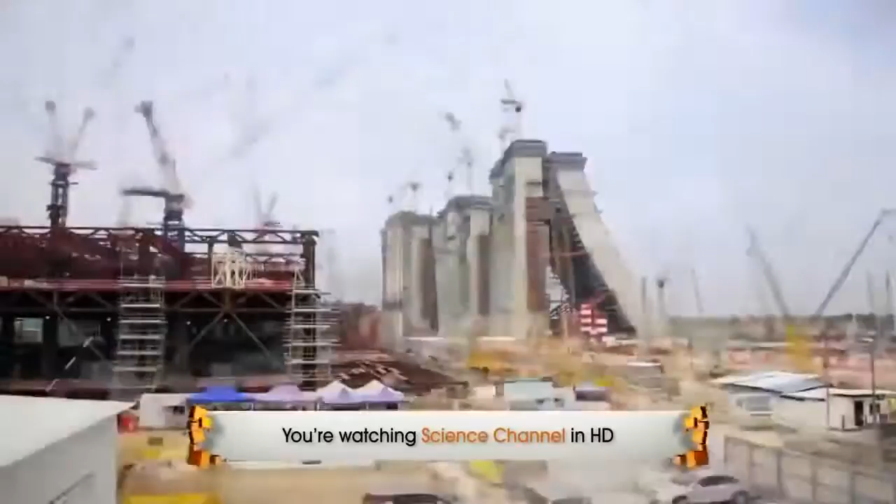Incredible feats of architecture. And right now, I'm going to take you behind the scenes of one of the largest construction projects in all of Asia. Singapore is reinventing itself. This small island nation is attempting to finish one of the most audacious buildings on the planet. It's the country's first casino, 3 skyscrapers, covering 9 million square feet, and topped off by an engineering masterpiece, the first ever Sky Park.

Longer than 3 football fields, with gardens, swimming pools, and restaurants, all higher than the Seattle Space Needle. We're actually in the pool right now. We're in the pool. This is the view from the pool. Wow. It's pretty spectacular. That is amazing.

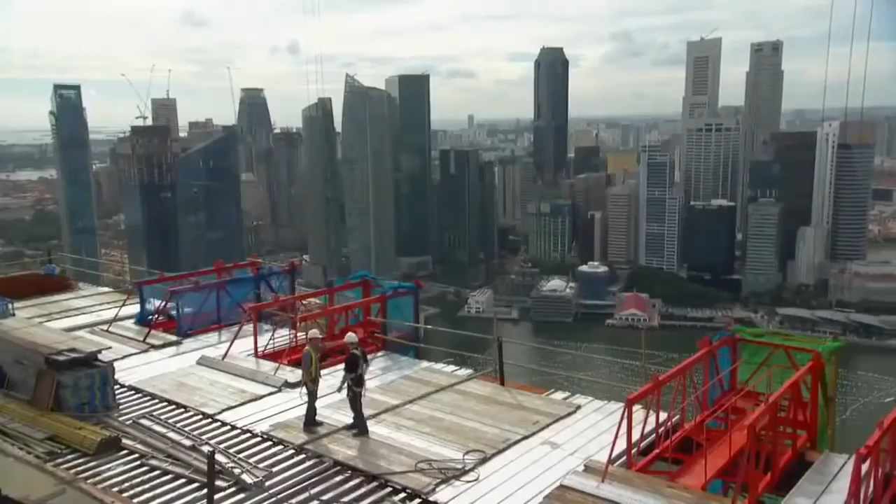To finish it, crews must perform some of the highest and heaviest lifts ever attempted. I mean, you're putting a piece of steelwork the size of an aircraft carrier on top of 3 towers. Tackle one of the largest paint jobs on the planet. You would never do this in America. And erect one of the longest cantilevers in the world, 200 feet out over nothing. Oh my God, that's enormous.

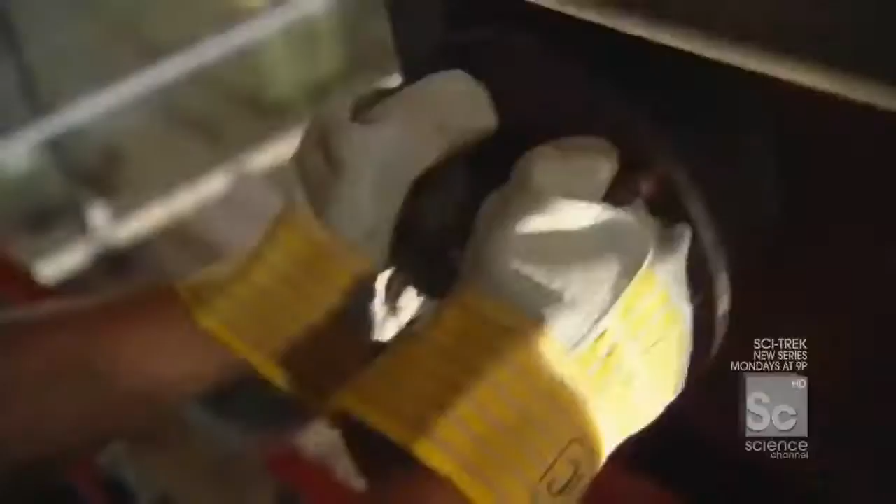I am in Singapore, a tiny island nation with less than 5 million residents. In fact, the entire country is smaller than all of New York City. Located at the southern tip of the Malay Peninsula in Southeast Asia, the main island of Singapore is both a city and a country, one of the most densely populated in the world.

Culturally speaking, it's a somewhat strict and buttoned-up environment. Chewing gum, against the law. Insensitive behavior is punishable by fine. And if you're caught vandalizing a building, you quite literally get hit with a stick. But despite this conservative cultural backdrop, Singapore is attempting to reinvent its image by doing something totally surprising. They're going to open a massive casino.

With no natural resources of its own, Singapore is risking $5.5 billion in hopes of cashing in on the gambling boom exploding across Asia. It's a pretty significant gamble because for Singapore, you've never had gaming before at this scale. You've never had a resort at this scale. Yes. You're taking a kind of a major leap. Yes, it's certainly a transformational project for Singapore. Where you hope to actually not just double, but triple the tourism receipts. That's big.

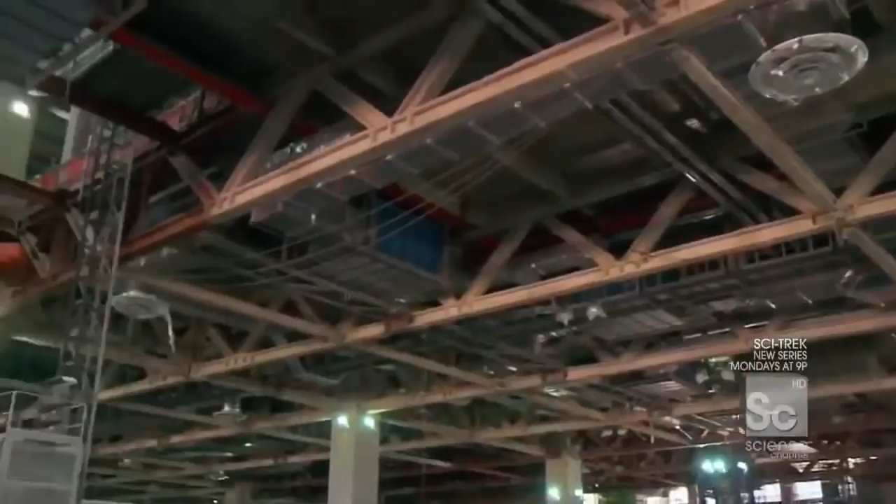The centerpiece of this giant transformation, the Marina Bay Sands. One of the biggest and most expensive casino complexes in the world. Unlike any hotel and casino ever built. Rather than just being a traditional hotel and casino that we might find in Vegas, instead, we have a museum, you have theaters, you have retail, you have a casino, massive convention center, 3 incredible hotels, and all of that capped by the first ever Sky Park. That is absolutely right. The Sky Park on the very top will become the icon of Singapore, we think.

In a move that has never been done before, world-famous architect Moshe Safdie put a park across the top of 3 massive skyscrapers. An 1,100-foot-long urban oasis with tropical gardens and one of the longest swimming pools on Earth. All of it perched 55 stories above the ground.

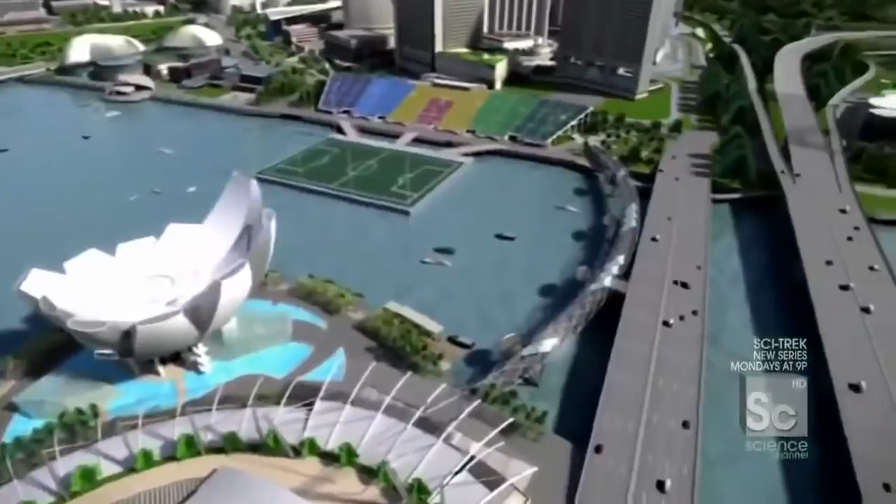So, Brendan, how do you describe a Sky Park to people? I mean, it's just a fantastic structure. I've never seen anything like it. There's 3 55-story towers, and you're putting a piece of steelwork the size of an aircraft carrier on top of it. So it's quite a feat. And there's a park up there. There is, well, there's more than that. There's observation decks and swimming pools and restaurants and all sorts of things. So it'll be a little city in itself.

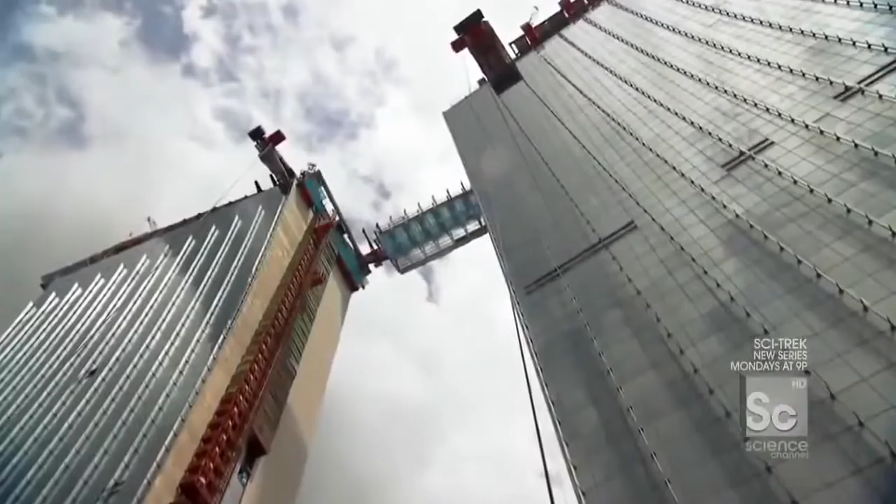The biggest challenge for builders, lifting 7,000 tons of steel, which is more than the main span of the Brooklyn Bridge, on top of 3 650-foot-tall buildings. To get it up there, the team divided the structure into 14 large but more manageable segments. 6 form the bridges connecting the towers, and the other 8 make up the observation deck, which sticks out 218 feet from the end. And right now, crews are about to lift the second-to-last bridge segment, a massive 350-ton piece that will hang between towers 2 and 3.

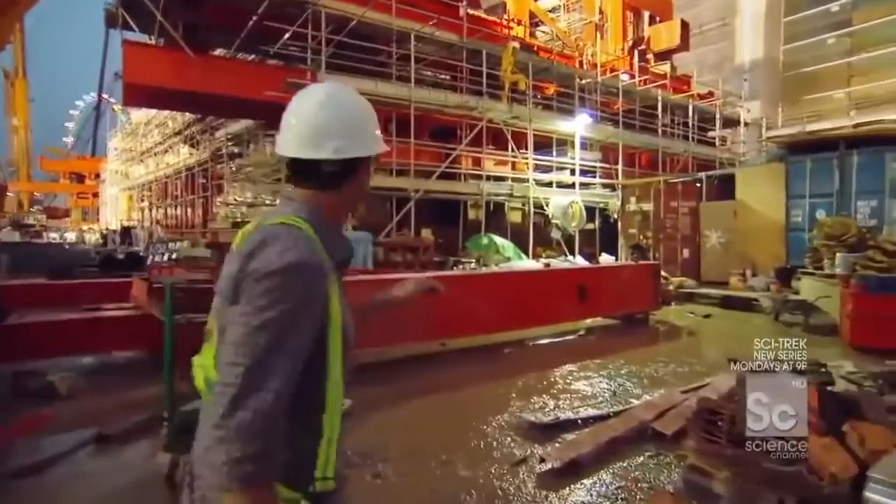It's a little after 7 p.m., and on most job sites, it'd be quitting time, right? Folks would be going home. But here in Singapore, we're about to begin one of the most critical lifts in the entire project. That bridge segment right there, an over 350-ton chunk of steel, is about to get lifted up over 650 feet in the air.

I mean, in principle, this sounds crazy, right? Yes. We're actually taking a bridge, lifting it up, and putting it on top of 2 skyscrapers. Yes. This has never been done. Never done. So you've got to be a little bit nervous to get this thing up. Oh, definitely. Yeah. We have to get it right.

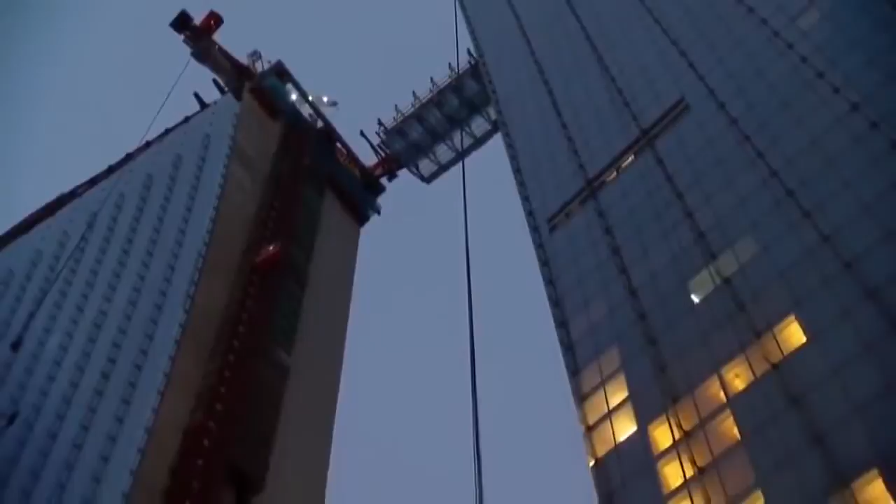Lifting this piece will take some of the strongest hoisting cables ever designed. Going up? All right, Solomon, up here? Yep. They get attached to the very top of the segment, 5 stories up. All right. And now, at long last, I'm on the top of the whole bridge segment, and you really get a sense of its length, because look at that. It spans all the way out between 2 full towers, over 150 feet long. And here, this is what it's all about. This is the shackle coming down from over 600 feet up.

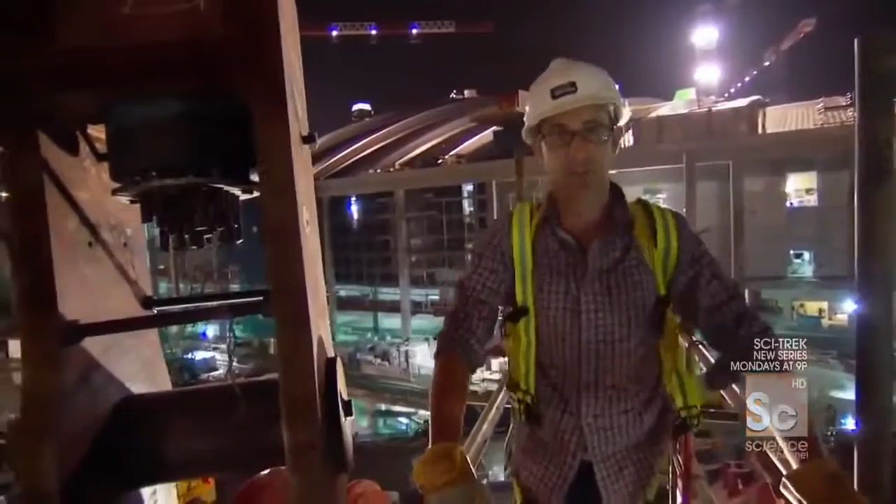And to really get that point, come here, check this out. Look at the amount of bound cables inside of this thing. Just the density. There are 2 of these shackles, one on this side, one on that side. We're gonna lift up over 350 tons of steel. All right, you call the man upstairs. An operator from the top of the Sky Park lowers the shackle down. There she comes, there it is, here it is.

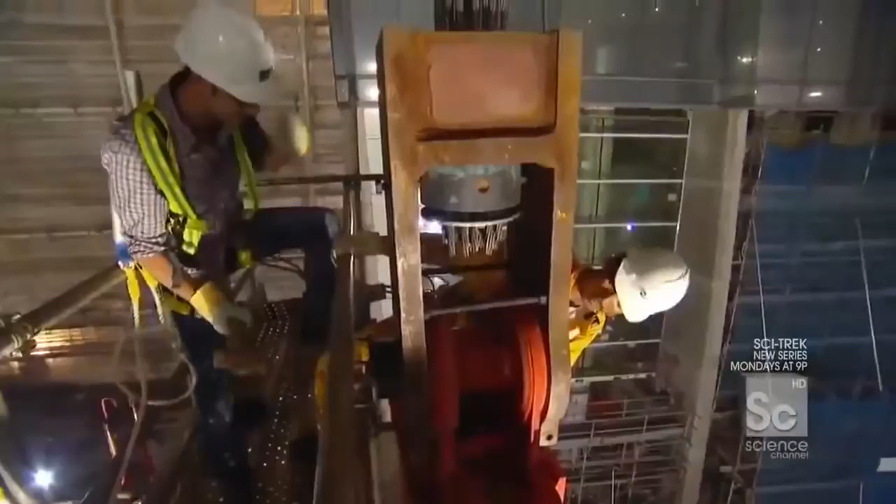Okay, 960 mm. It has to line up within 1/10 of an inch for this 150-pound anchor pin to fit through. Oh no, I'm stuck. Push, fight, come on, shake it a little bit. Hammer, give it to me, Poppy. Not here. You ready? Here I come. Once the pins are pounded into place and the shackles are connected, there is one final step to make sure that the load is secure.

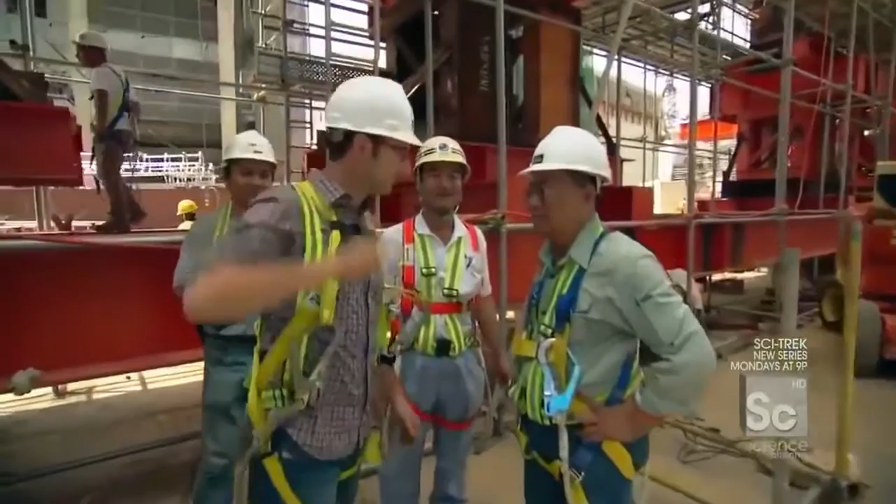Woo! Overnight, crews test the connections for 12 hours by hanging the segment just 4 inches above the support. If everything looks good, it is ready to go up. Okay, Solomon, she's floating. Yes. 4 inches off the ground. Ready for the lift? Yes. How's the wind? If you can see, it is swinging. And if it swings, it might hit the building.

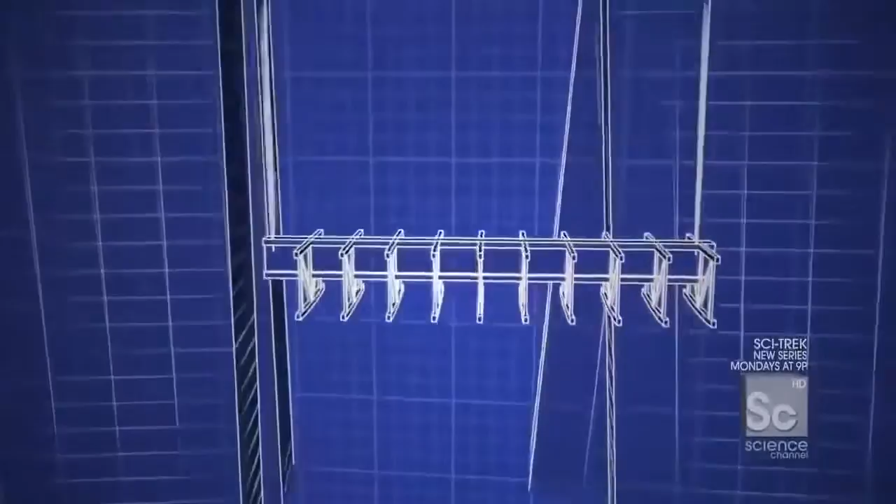So when the lift begins, the concern is in a strong wind, like a pendulum, it could move and actually hit the building. Yes. It's that close to the building? It is very close to the building. Because of the curvature of the towers, this piece must pass within 10 feet of 2 glass skyscrapers on its way up. Any wind over 5 miles per hour is enough to call off the lift. So are we good? Are we ready? Yeah, good. So it's now okay to go.

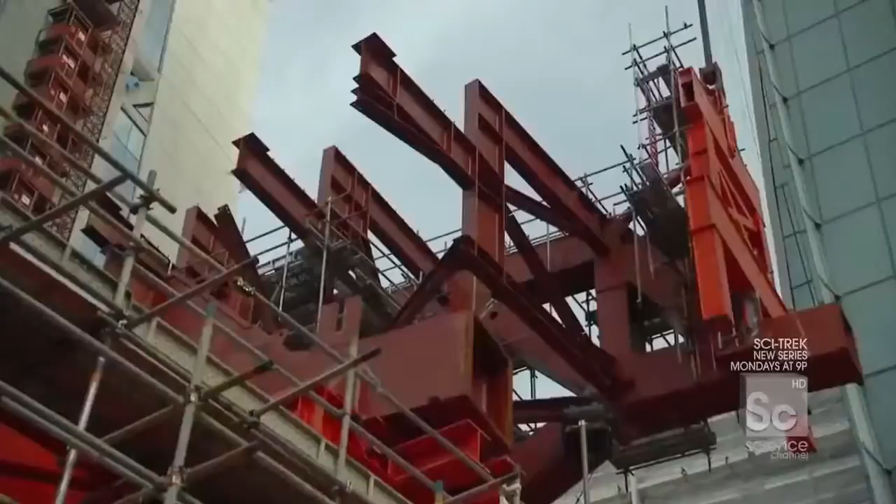Typically, crews would use tower cranes for heavy lifts, but this segment far exceeds their capacity. So instead, engineers are borrowing the technology from a different kind of construction, bridge building. Even the most powerful tower crane can lift about 20 tons. This thing weighs over 360, not an option. So they went with something called a strand jack. And to understand how it works, imagine 2 hands or clamps holding a rope. One hand locks the rope, the other brings the rope up, grabs the rope, goes back for more, brings up more rope, and so on and so forth.

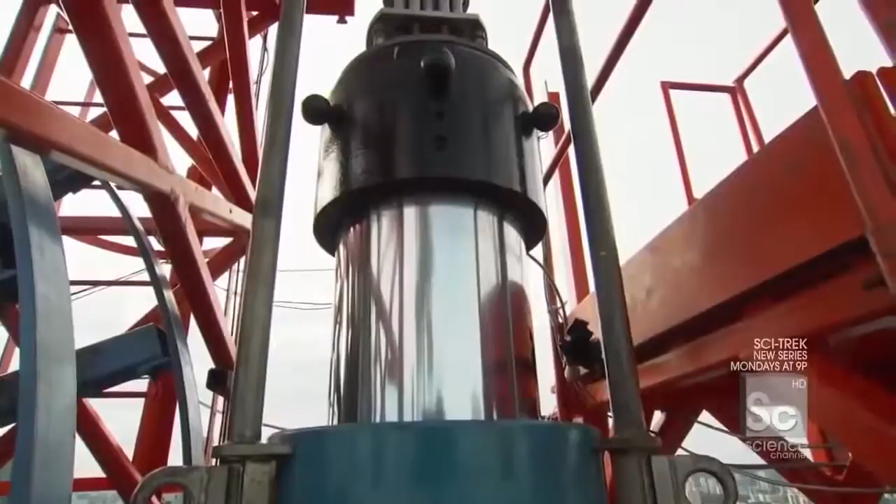Strand jacks work on simple hydraulics. A bundle of 22 half-inch diameter cables passes through 2 clamps. The top clamp grips the strands and moves up almost 2 feet. Then, the bottom clamp locks the cables in place while the top moves back down for the next pull-up. It takes 2 enormous strand jacks to lift this segment, one on each tower. Combined, they could lift the Statue of Liberty. It's the first time that this technology has been used to make lifts this heavy from the top of a skyscraper.

Tony? Danny. Welcome, Danny. Good to meet you. Good to meet you.

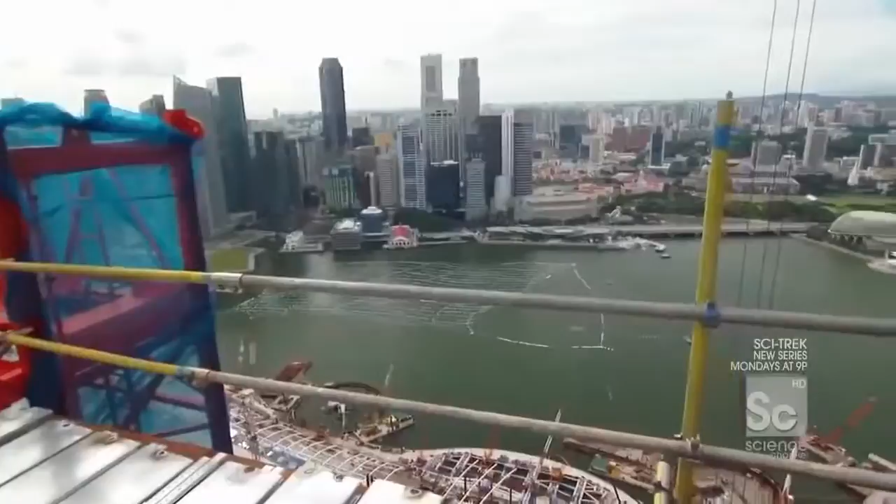Tony, where am I standing right now? Well, you're on the Sky Park. So this is kind of where the action is. This is where the pool is. Yep. Right where we are now is the second swimming pool. We're actually in the pool right now. We're in the pool. This is the view from the pool. Oh my God. People will be able to swim out to the edge of the pool. Yep. And literally, there'll be no edge, right? It'll be an infinity edge looking out over Singapore. Wow. It's pretty spectacular. That is amazing.

And what's making all of this happen is this really just nasty looking beam. That's right. So this enormous frame is supporting the strand jacking units. Now, can we actually head up top to the strand jack? Yeah, we can. Let's go this way. The strand jack sits on a temporary support structure that extends 30 feet out from the side of the tower. Tony, where we're walking right now, we're actually leaving the skyscraper below us and now heading out. We've just walked off the edge of the building.

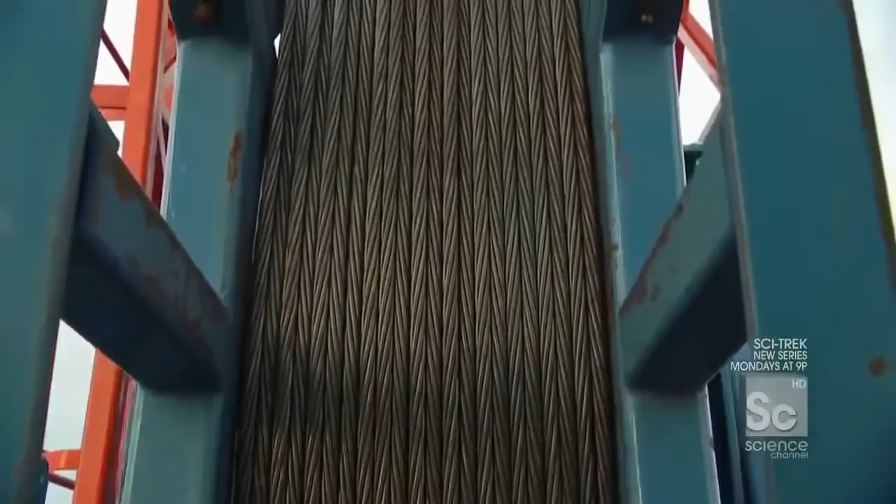Beyond. So we're now standing perched out. There's no more skyscraper below us right now. There's no building below us. It's awkward. It takes almost 30,000 feet of cables to raise the segment, enough to cross the width of Manhattan. And if any of them get tangled, workers cannot lower the piece back down. So one of the most critical jobs on the site falls to the cable manning crew here at the highest point of the Sky Park.

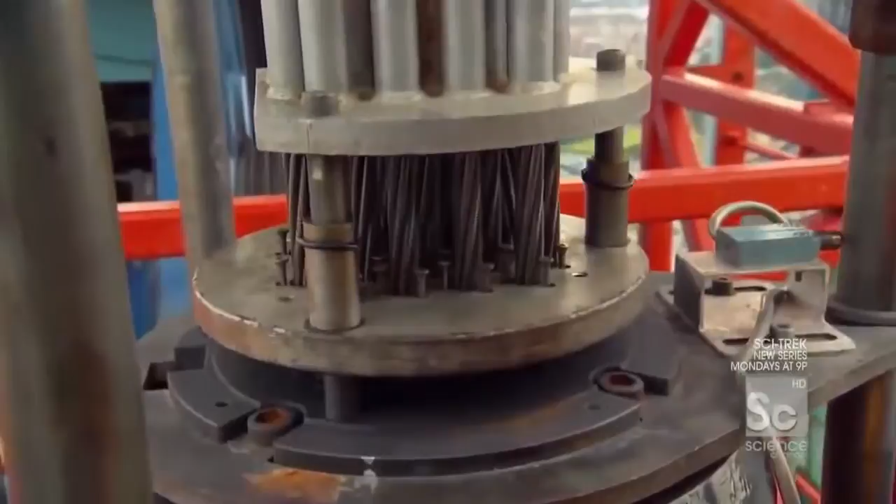Okay, so I am now standing at the very top of the Strand Jack. And you know that because right here, this is it. This is the top of the cables. And what we're about to do, every 30 strokes, they stop everything, clamp the lift, and spray some lubricant inside to make sure everything moves real freely. Unfortunately, I'm getting tasked with that role right now, so what do you got, some WD-40 we're doing this with? Look at this guy. Why is this the most low-tech thing in the world?

Okay, so now what we've done is we've taken the collar off, we've lowered the jack down, now we've exposed the cables to give us good access for some good greasing. Okay, Romley, how do you grease it up? Spray and pull out. Put in, spray, pull out. Go in, spray, pull out.

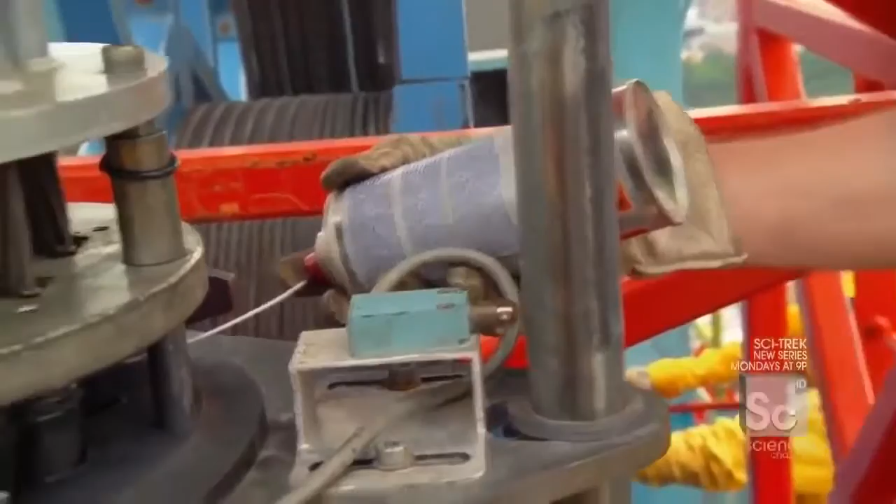You know, it's sort of humbling to have to climb up to this point, to have that behind you, to have to take a spray can like this, stick in, spray, pull out. Stick in, spray, pull out. Go in. These guys have to grease these cables once every hour for the entire night to get this segment up the final 500 feet to the very top of the Sky Park.

Coming up, a one-of-a-kind solution to fight Singapore's intense sun puts up a fight of its own. Whoa. Hang on. I'm gonna pull you right outside of the basket.

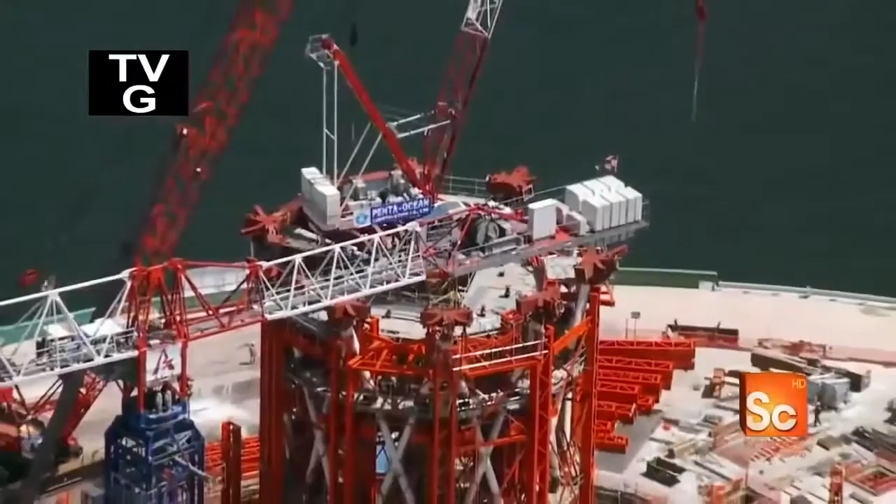Singapore is just 14 miles long. And with literally nowhere else to expand, this tiny island is increasing its footprint by actually filling in the sea, creating almost 1,000 acres of land on which to build an entirely new downtown. So tell me something. If I was standing here 5 years ago, what would I have seen there? Well, 5 years ago, you wouldn't see the floating gallery, you wouldn't see the wheel, you wouldn't see Marina Bay Sands, neither would you see the financial center. So this is a radically different skyline in just 5 years' time.

Yes. Singapore's evolution involved 30 years of land reclamation, followed by 5 years of construction, all culminating with the Marina Bay Sands. So 5 years ago, this would have been called the old downtown of Singapore. Yeah. And now with the Marina Bay Sands completed, this becomes the new downtown. Yes, absolutely.

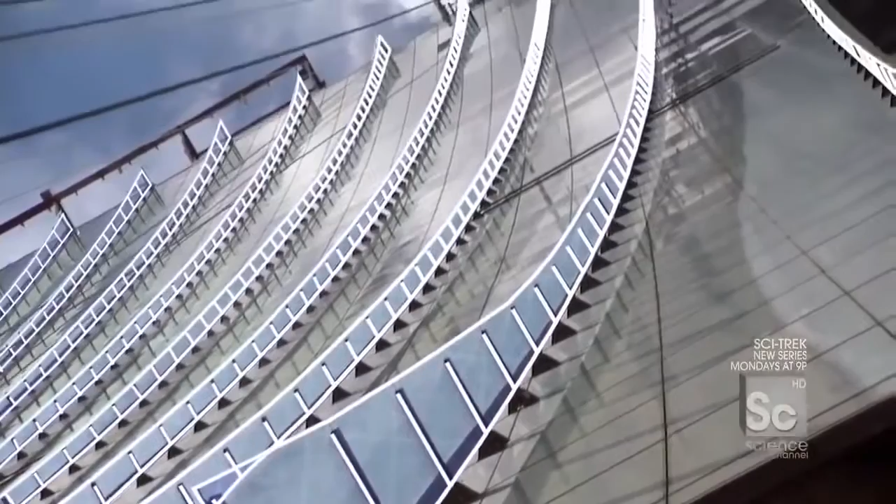The Marina Bay Sands' 3 hotel towers will offer guests phenomenal views of Singapore's new downtown. But they also had to be a stunning centerpiece for the city's redevelopment. So, to define their curved silhouette, the architect clad the tower facades with 1,900 glass fins, which also perform a key functional role for the building.

The western face of the towers gets the most intense afternoon sun. So when the light hits the fins, they actually deflect the sun's rays, casting a shadow that reduces the heat on the hotel rooms by 20%, while still enabling clear views of the bay. But this distinctive design feature is also one of the most difficult to install.

I think today is gonna be one of those days where I go and do something that I kind of think I shouldn't do, but in the name of really understanding how it is they build this building, we're gonna do it anyway. I'm gonna take you in a gondola up the side of a building, almost 600 feet, to install glass fins. And the guys who are gonna help me do it are right here.

Terry? Hi, Danny. Good to see you. David, how are you? Danny, good. Not bad. What are we up to, fellas?

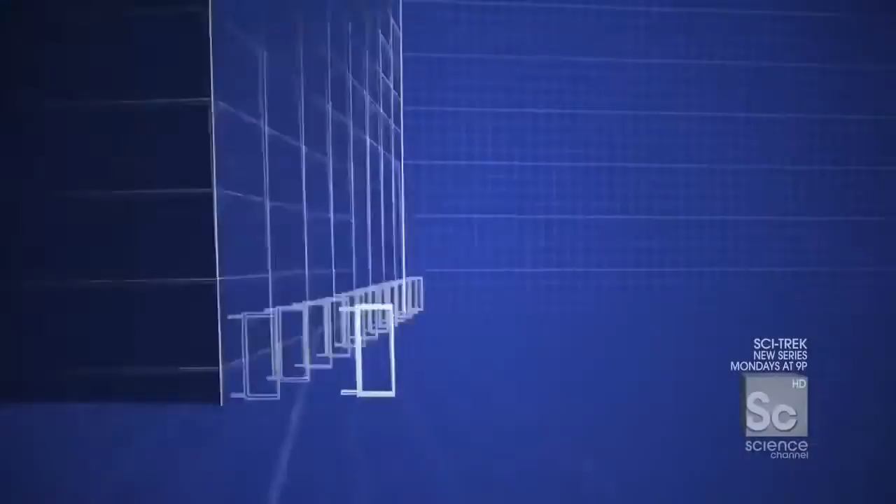We're actually going up to the top. Basically, we're going to install the last fins to Tower 1. And these fins are actually hanging perpendicular from the facade of the building. That's correct. Each fin is 10 feet tall and weighs 400 pounds. They're hung in straight vertical lines, protruding up to 4 feet from the side of the tower.

Because the facade actually curves outward 5 degrees at the top, there would not be enough clearance for the Sky Park lift to pass by. So 12 fins in the upper corners of each tower were left off until now. So this is it. We are closing up the curtain wall of Tower 1. Yes. Big milestone. Big milestone. All right, take me over to my maker. Let's do this. Okay. No problem. Lead the way.

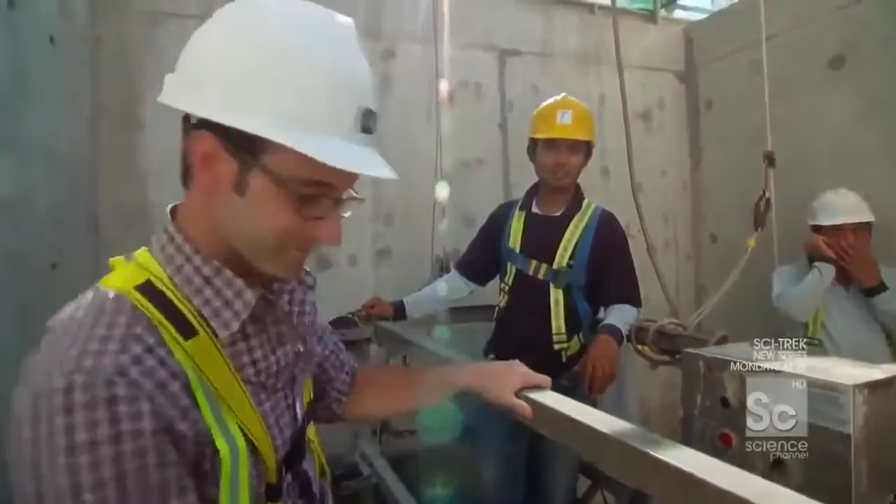Terry's crew installed the fins from a 6-foot-long gondola hanging off the side of the building. Okay. We doing? All right. You gotta be kidding me. It's basically the size of a bathtub, swinging from 2 sets of 650-foot-long cables tied to the tower. Show me the safety, please. It's so precarious that I'm going to be tied to a separate cable in case the main cable fails.

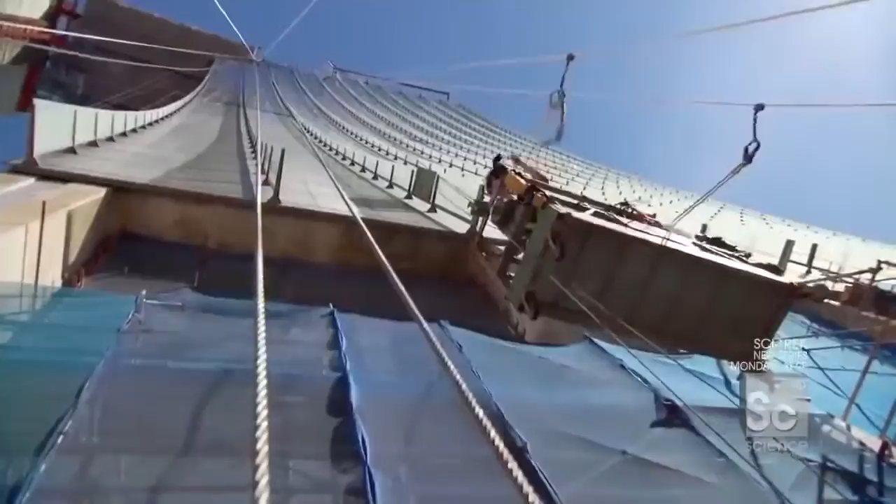Yeah, here we go. The gondola travels at just 0.2 miles per hour. Here I come. Moving along, just moving along. So it'll take me more than a half hour to reach the top. Oh my God. This gondola looks like it was built by the Unabomber. Sometimes I don't really feel like I give you exactly what's going on for me right now, so I want to give you just a little taste of what I'm seeing. There is a fantastic view of Singapore. There is Jay, my chatty friend. And there is not a good situation.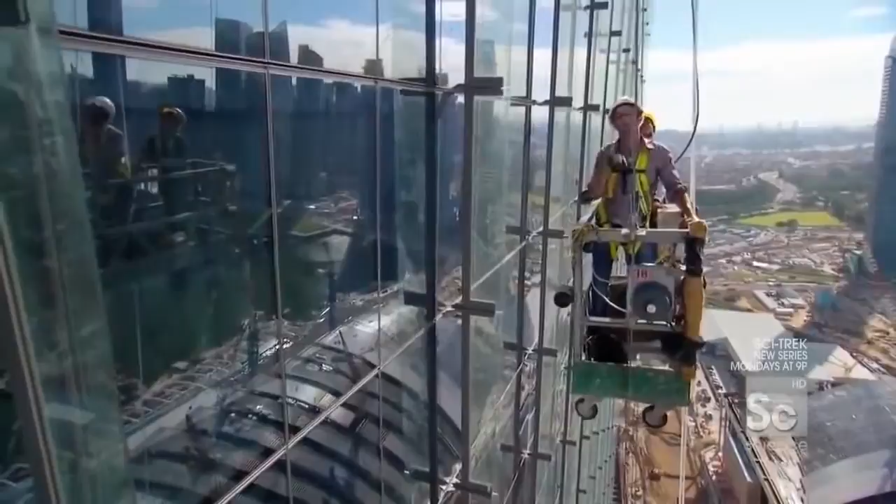All right, we're almost near the top, and you can tell because the building is beginning to bend back on itself and get closer to me. Right there, check it out, we're about 80 feet from the top of the building, and if you look up, you can actually see the missing glass panel. And as I approach the top of the skyscraper, they're prepping the glass. There she is. Oh, the wind is really moving up here.

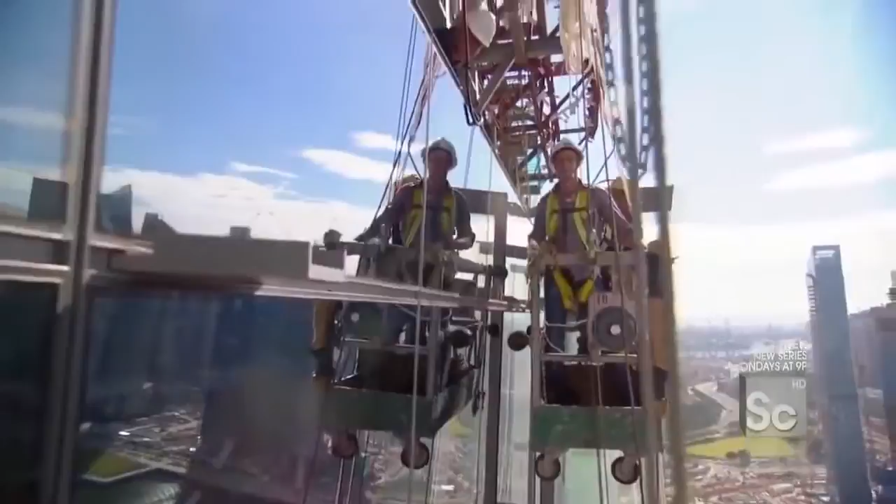That looks safe. Hey, fellas! How are you? Okay. Nice weather, huh? Okay, this is something you don't see every day. I'm outside a skyscraper, and right here, right now, I am touching the top of the building. We are on top of the skyscraper. All right, who's ready to install some fins?

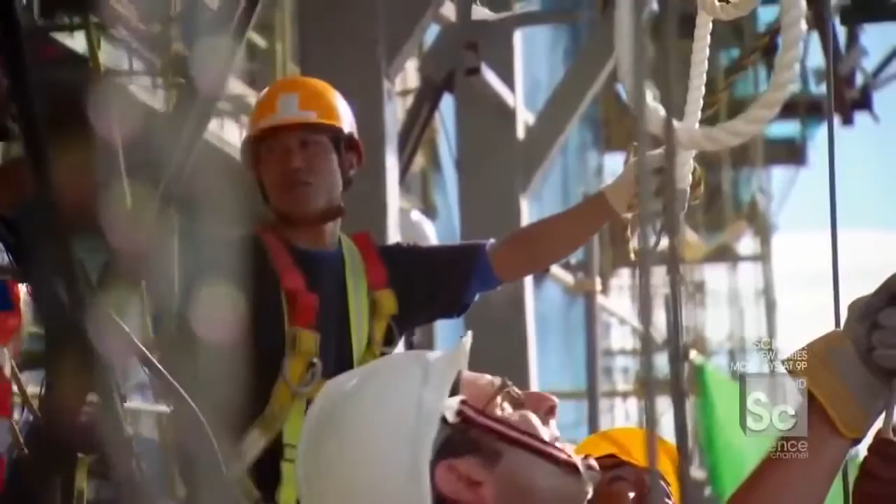Each fin is a custom-built pane of solid glass. I've got the line. Hang on. On a calm day, they are extremely difficult to manage. The wind is blowing this thing out. Give me a hand. But on a day with even a light wind, the task is almost impossible. Hang on. You feel like it'll pull you right outside of the basket. Give me some help. I'm not kidding. Every time you get a little gust of wind, I can feel my feet getting pulled a little bit. There she is, slowing down.

It's basically like a big double laminated glass sail. And if the wind catches it, I mean, it moves. Okay, let it come down a little bit more. The fin can swing up to 20 feet while attached to the tower crane. Coming this way. Okay. Watch out. Someone help him. That's just too dangerous for the final installation. So the team has to transfer it to a more precise chain block mid-air.

Whoa. Hold that side, please. All right. So this is it. What we're doing right now is essentially taking the load from the crane and transferring it to that chain block. Are we in? Okay, I think we're set. This is another one of these moments in my life where I say to myself as an architect, did you really need the fins? Did you have to have fins? Building would have been fine, you know?

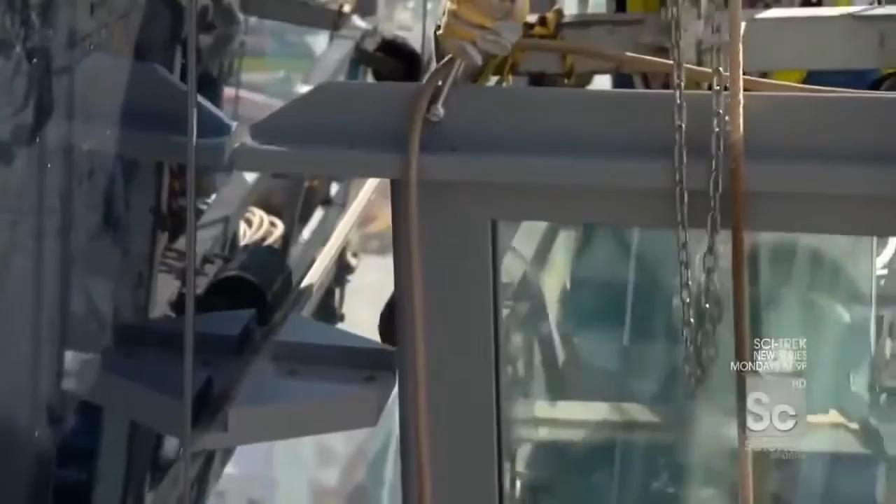Okay, gondola down. The fins are designed to clip into each other at the bottom. Lean down now, Jay. But here, at the very top connection on the highest fin, it gets locked to the building with bolts. Oh boy, this is gonna be a nasty one. Okay, Jay. 4 bolts. Give me your thoughts. 1, 2, 3, 4. Are we good? Come here.

Bring it in. I need some. Come on. Give me it, babe. There it is. Okay. That's right. Whew. 4 bolts, locked in, lined up. We, Jay, are done. Can we go home? Home. That much he understands. Let's get out of here.

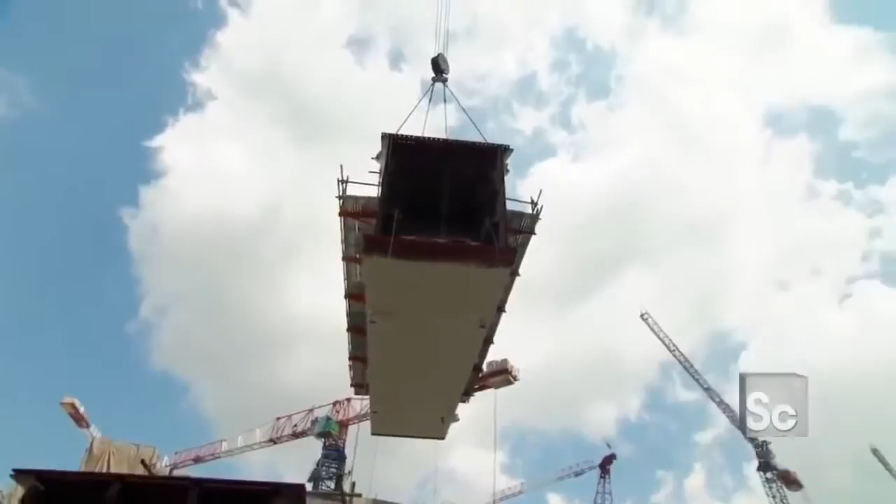Up next, building one of the longest and highest cantilevers in the world, jutting out more than 200 feet over nothing. Oh my God. That's enormous.

Singapore's new Sky Park is the first of its kind. A steel structure longer than an aircraft carrier, on top of 3 skyscrapers taller than the Seattle Space Needle. And on the northern end, the architect took this innovation one step further, creating the longest cantilevered observation deck in the world. It's the biggest and heaviest section of the Sky Park, and it hangs out 200 feet over thin air.

When it's done, the Sky Park is going to look to the eye like one 1,100-foot-long continuous element. But the reality is, it's actually made up of two very different structural conditions. Bridges on the one hand, and something called a cantilever on the other. Spanning between towers 1 and 2 and towers 2 and 3 are two bridges, basically acting like tabletops. The force goes from the bridge, transfers into the towers, and down something called shear walls into the foundation.

Now, the cantilever is a different story. A cantilever, by definition, is a load supported on only one side. So what you have here is a 218-foot-long span, almost like a diving board, perched out over nothing. Intuitively, that load wants to just twist off the building. So to keep it down, they've put not one, but two 700-ton backspans holding down the cantilever. The two backspans weigh as much as a fully loaded freight train, but that weight is critical to balancing out the cantilever, which will jut out longer than a 747 from the end of Tower 3.

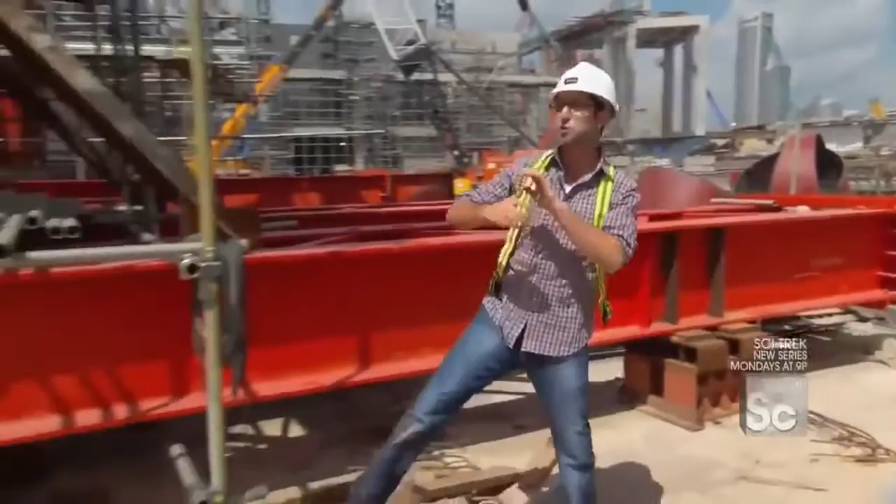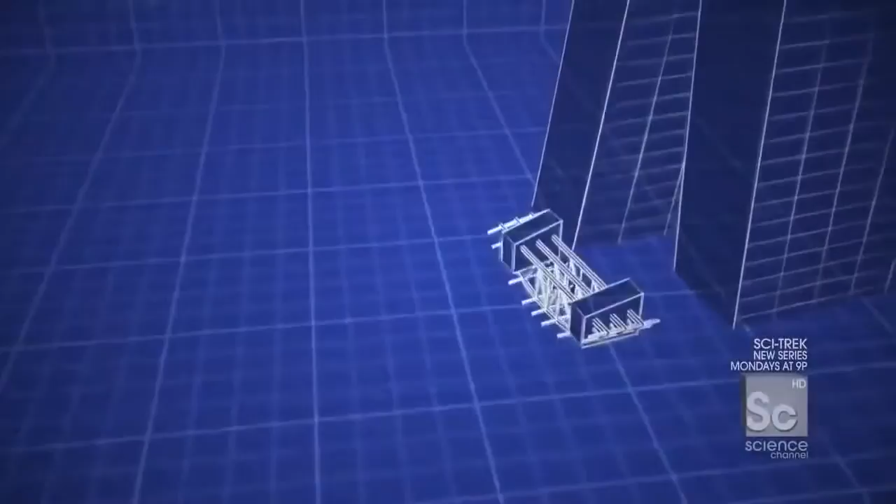There are 860 tons of structural steel that make up the 218-foot-long enormous cantilever. It is so big that they actually assemble the entire unit here on the ground before sending it all the way up there. The cantilever is just too big to be raised in one single lift. Instead, it's divided into 6 segments. Once they're 650 feet in the air, crews will have just one shot to fit them together. So before the segments can be lifted, they're assembled on the ground to be sure that each connection will fit perfectly.

So these pieces behind me represent the very final pieces of the cantilever to be assembled here on the ground. So once we get this and this bolted onto that massive cantilever, the lifts can begin. So the crane's now setting the shackles up. We're going to go on top of the piece to connect it. The piece we're attaching today is 12 feet tall.

Come on, jungle gym style, baby.

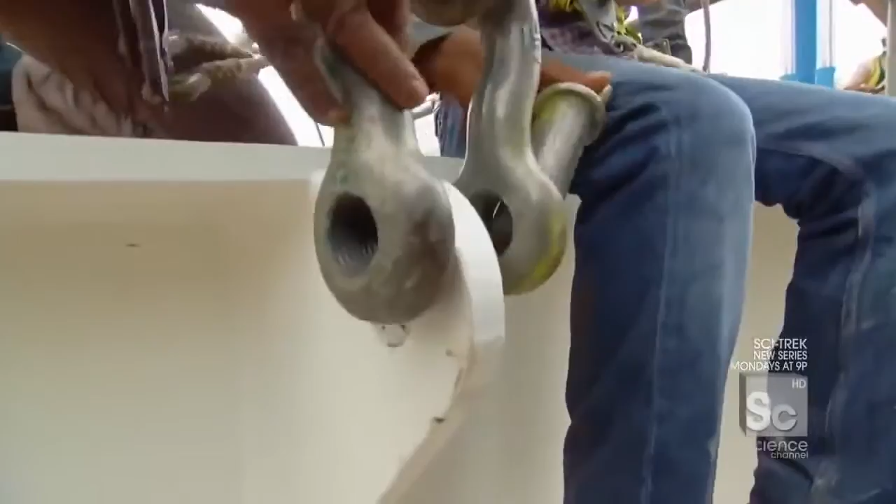And it weighs 30 tons, as much as 2 Mack trucks. A crane will lift it over to the rest of the cantilever using 4 extra-large shackles. So Viram's now tightening up this shackle. So shackle number 1, 2, 3, and 4 are all connected. The next step is to take the piece that I'm standing on, lift it up, and extend that cantilever another 50 feet.

You ready? Knuckles? Knuckles! All right. You ready, Knuckle Man? Knuckle Monster, you got it. Nux Magoo, come over here for that. Bang! We are ready to go. Okay, I'm ready.

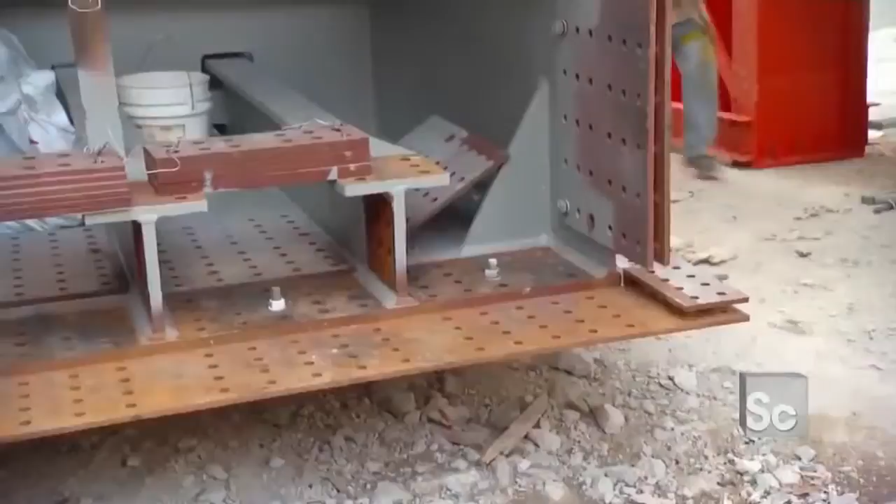So what they've done is they've just put a bit of tension in the line, lift the piece just off the ground to make sure the shackles look nice and they know where the center of gravity is. So are we good? Are we ready? Yeah. All right, let's go. She's off. Out of our hands. Now the crane's got her. Just gonna swing her all the way around this way. What's really worth noting is as you look at this thing, this massive floating piece of steel, it's but a small fraction of the entire cantilever that's going up there.

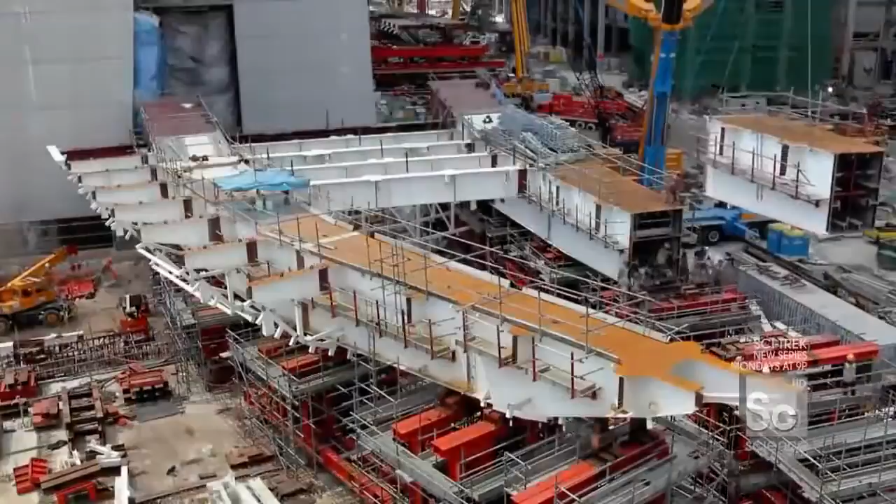Even with 1.5 million pounds of steel, this cantilever will still be susceptible to the problem facing all structures: movement. All buildings, all bridges, even all cantilevers have a natural frequency, meaning they move ever so slightly. Now, if the movement of wind, or the movement of people even, starts to align with that building's movement, it can combine and collaborate and literally shake a building. So when the engineers were designing the cantilever, they had to be concerned with not just how many people stood on the edge, but also how they were moving.

This cantilever has been designed to withstand wind and earthquakes, but its most dangerous threat could come at the hands of a DJ. Yeah, it's thousands of tons of structure up there, so you and me jumping about, it's not going to do very much.

But if you get 100, 200 people all jumping up and down at the same frequency, then it can actually excite the cantilever and you actually start to feel it. Right. It would take hundreds of people dancing to the exact same motion, like the Macarena. Yes, that's right. And believe it or not, our dynamics engineers have iPods with thousands of songs in them. No way. That actually have the frequencies of all of these songs.

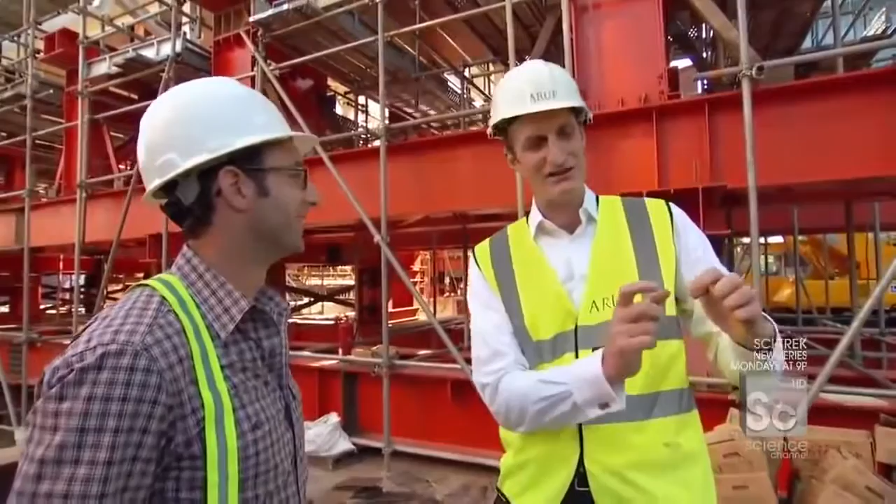So, once we actually find out what the frequency is, in theory, you can say you can dance the Macarena, but you can't dance the bus stop or whatever. That can't be true. Is that true? Yeah, that's right. So you're telling me that some engineer is doing intense load calculations and solving the fact that this thing can take the electric slide, but it cannot take the achy breaky heart. And they know that in advance and it's been designed.

More or less, yeah. Imagine the party, like it's the party's going great, a big wedding, and all of a sudden someone puts on the Macarena and is like, no!

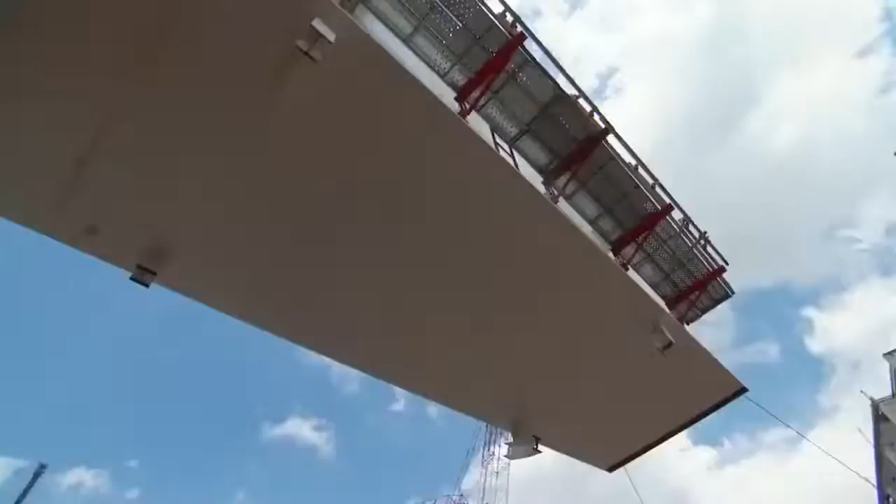Now that the piece has made its way over to the rest of the cantilever, the next major challenge is lining this giant segment up for attachment. So the piece is now literally sitting right on top of my head. And just imagine, on top of this incredible white long piece of steel will soon be a garden, a pool, and a dance party.

Slowly guide it down. What's incredible about lifts like these is that the first 99% happens almost instantly, and now it gets down to the details. Pushing it, pulling it a matter of inches, to get all of these holes lined up, to get the bolts in, and take the load off the crane.

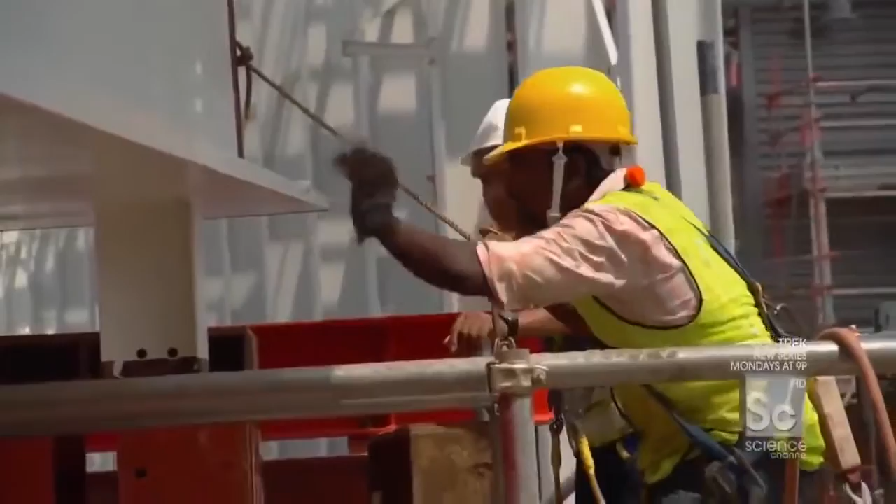Once the piece is in place, the crews have to line up all 1,500 bolt holes. There are so many bolt holes. They'll connect about a third of them here on the ground to make sure everything fits together before liftoff, because there are no second chances once this piece is airborne. So this is how one fits into the next piece right here. You have these two plates on top, and they're sliding over top of the previous cantilever piece.

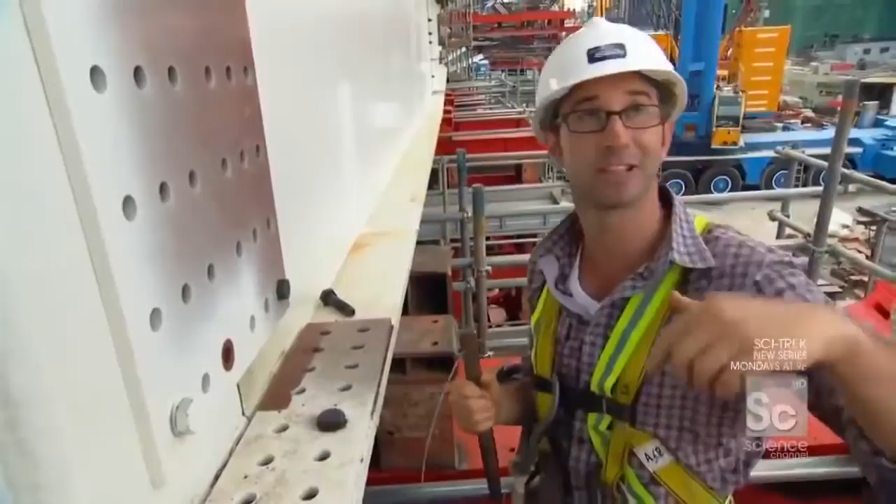Here it is, it's coming in, it's coming in. Once she's there, we'll put this pin in to lock the piece together so we can release the crane and move on. About 2 inches. Just about there, just about there. Okay. Yeah. Use the head mark. The pin secures this new piece to the rest of the cantilever, so bolting can begin.

I hit it every time. Yeah, okay. I never hit it every time, man. I never do that. Usually I like break a finger and knock some steel off the thing and almost break the hammer most of the time. I knocked the crap out of that thing.

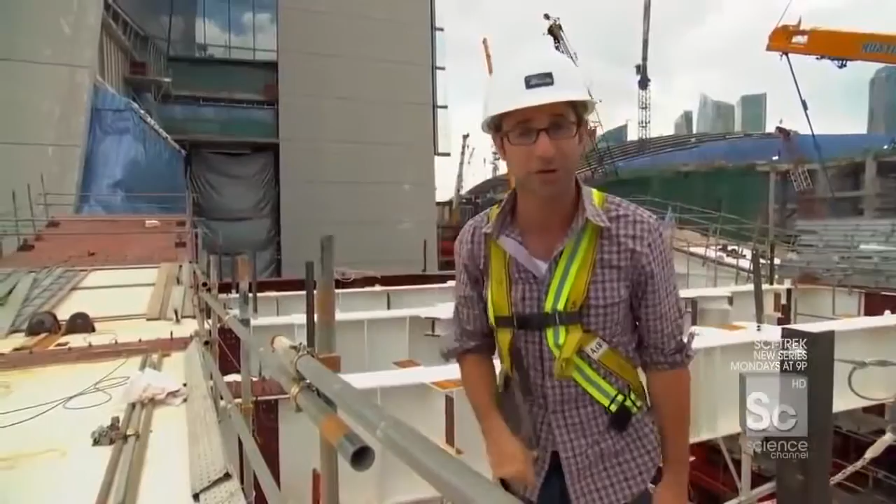Well, as you can see, the piece is in its final location. And now from where I'm standing, I think you can really get what this thing is. An 860-ton, 218-foot-long steel diving board that's going to be perched out over 600 feet in the air. And coming up, a hotel like no other, with a lobby bigger than a cruise ship wrapped in glass. This is probably one of the most spectacular corridors I've ever seen.

But first, what is the maximum number of people the Sky Park can safely hold at one time? The answer after the break. The answer to the trivia question: 3,900 people can safely be on top of the Sky Park, but only 900 of them can be on the cantilever.

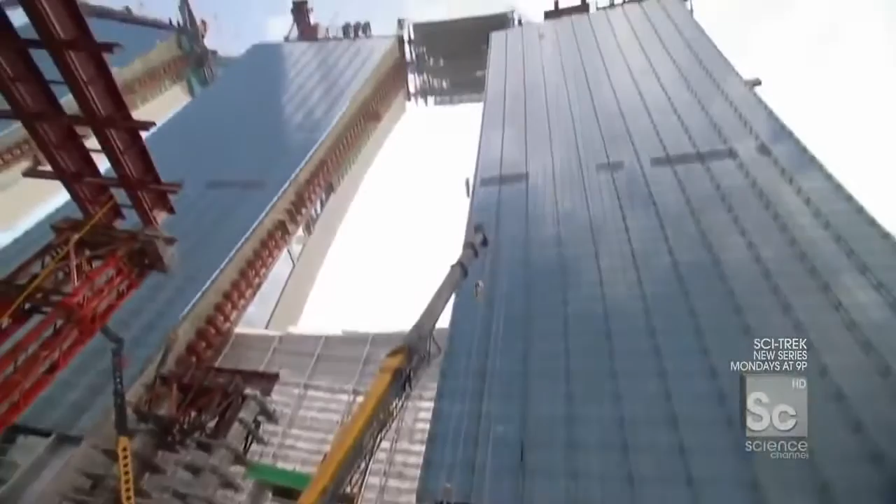Singapore is the gateway to Southeast Asia. And for the past century, its economy has depended on its location as one of the world's busiest shipping ports. But this city is in the midst of a makeover. When the Marina Bay Sands opens later this year, Singapore will instantly become one of the largest gaming markets in the world, putting it in the same league as Las Vegas, Atlantic City, and Macau.

When Macau opened their casinos, they looked to the past for inspiration. You have the Venetian in Las Vegas, you have the Venetian in Macau. Carbon copy, only bigger. But here in Singapore, a country so focused on image, they didn't want to mimic what came before them, but instead, they're trying to literally reinvent the idea of a hotel casino.

The difference comes down to design. The typical casino model involves a giant gaming floor with a flashy attraction out front and a hotel connected in the back. But with the Marina Bay Sands, the architect actually separated the hotel from the casino and relocated the attraction on top in the form of a sky park.

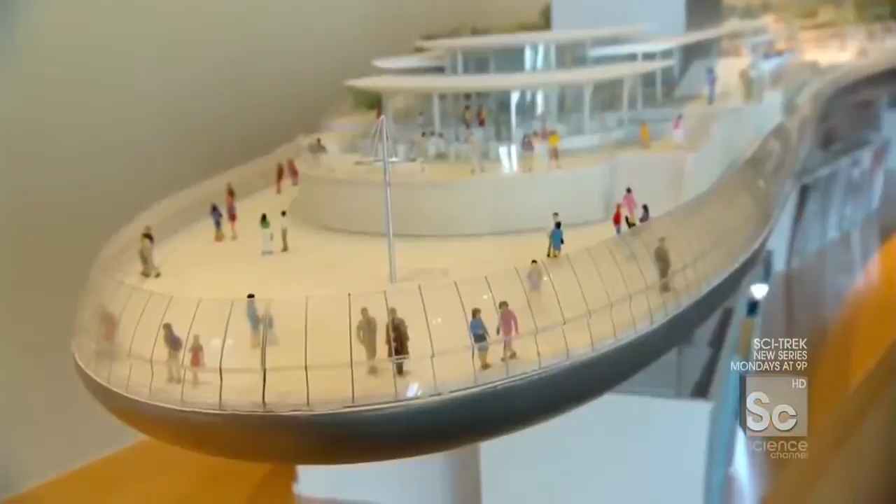From my perspective, when I think about a hotel and a casino, I think of a ginormous casino, a tall hotel in the back, and basically not being able to check in and go to my room without passing a blackjack table or a slot machine. This doesn't follow that model. It does not. Singapore has a very particular vision as to how they want the gaming component to work. What we built here was not something that was casino focused. It was all of this. So the casino is part of something far grander. And key to making that happen is not just building a set of normal, typical expected structures, but instead to do something like that. Correct.

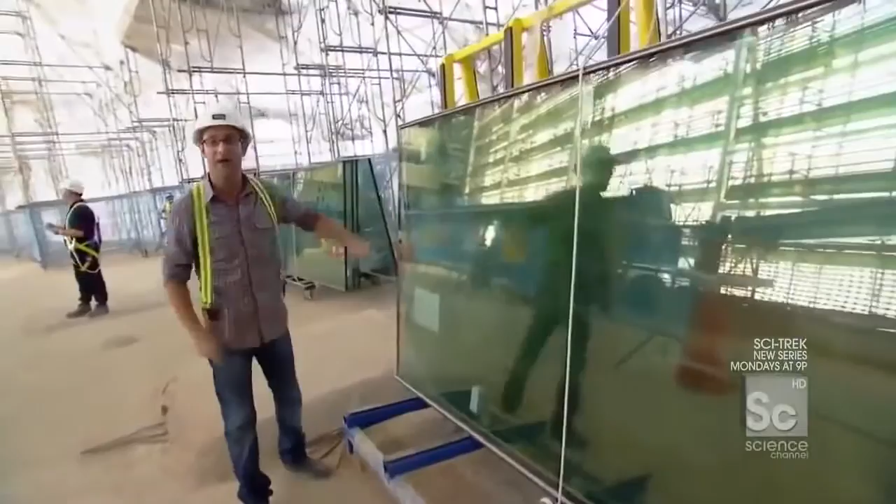This revolutionary design carries over to the hotel towers themselves. To create a hotel lobby like nothing before, the architect actually split each building apart for the bottom floors, creating one long tapered space linking the three separate towers together. The 3 hotel towers are all connected by one long continuous atrium. And that atrium is covered in glass. These massive 9-foot-long panels that we're about to take from down here and install right up there. 3,500 individual panels will hang throughout the atrium, transforming this space into one 850-foot-long tube of daylight.

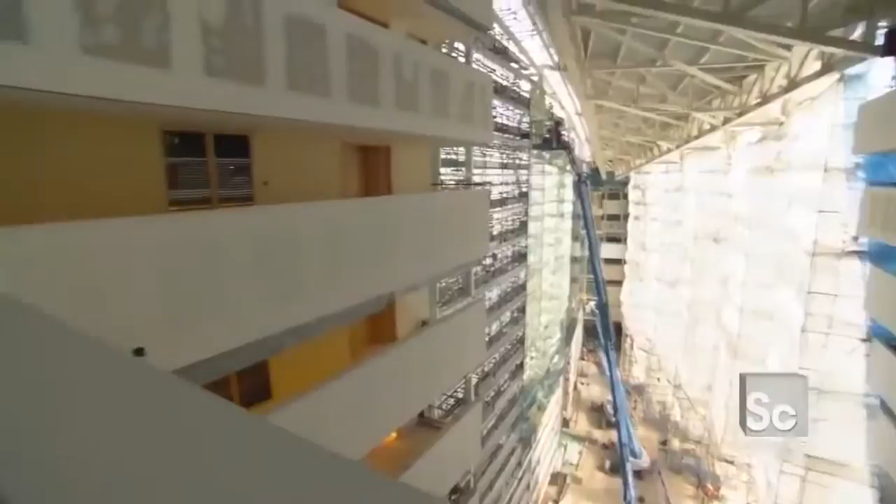So Terry, once the scaffolding comes down behind that glass, this whole chamber is going to be just awash in light. Yes, that's correct. And these spaces literally link all 3 hotel towers and let you look from one end of the building all the way down to the far end. That's correct. So this is more than just a kind of connective hallway from one hotel to the next. It's not just a corridor. This is not a corridor. No. And if it is, it's probably one of the most spectacular corridors I've ever seen. Correct. The atrium glass is a key part of the tower design, but it also plays an important functional role in sealing up the building.

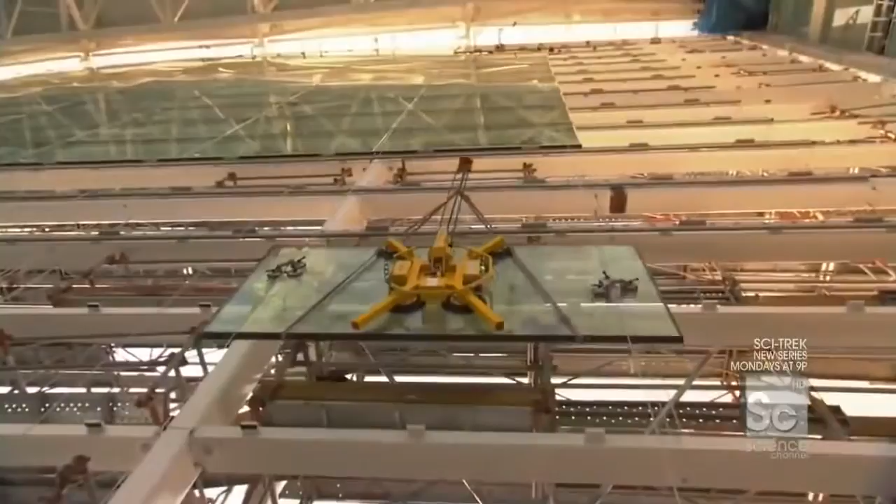With hotel guests arriving in just 6 months, the delicate job of hanging all that glass needs to happen quickly. Now, why is it so important to get the glass on the atrium and button up the facade? The vital bit is we actually have to make the building watertight as quickly as possible to enable all the final finishes to commence on the inside. So all the sheetrocking, carpeting, wallpaper, painting, that sort of stuff can't happen if moisture can still penetrate the building. That's correct, yes. So today we're going to be headed, where, up there? We're going up to the top and we'll be installing the top piece of the glass. So we have a big task ahead of us. To finish the atrium on schedule, Terry's team has to install 200 panels a day, about 5 every half hour. So here the guys are, they're just getting the glass ready.

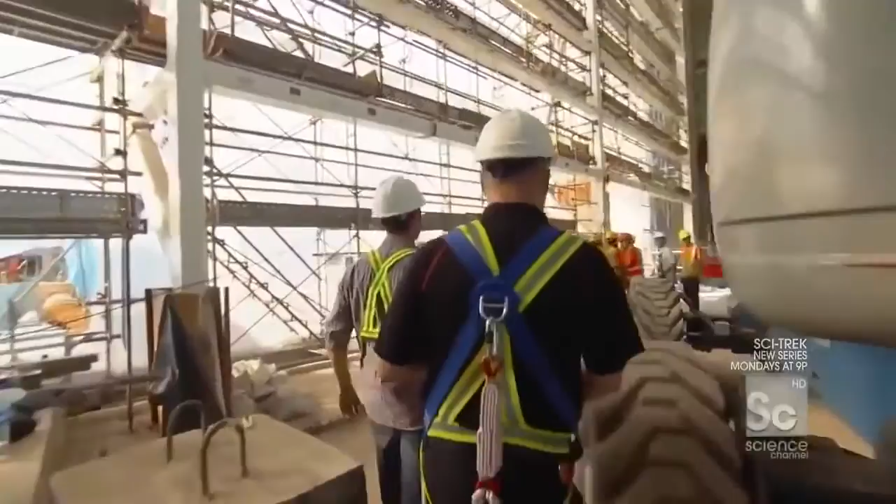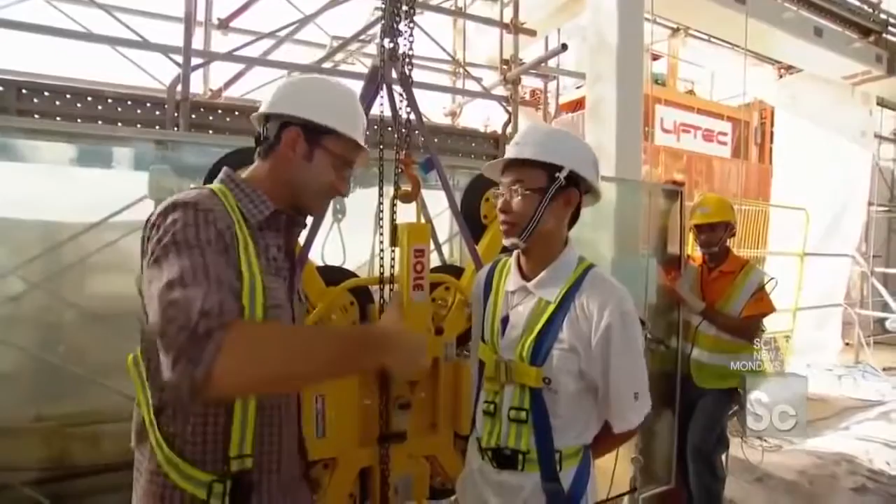A task requiring 8 international teams of glazing specialists. Hello, sir. I'm Danny. I'm White. Why? Nice to meet you. Nice to meet you. Yeah. So Why, you're one of the installers? Yes. And you've been installing glass how long? My experience is over 10 years. Your experience is over 10 years. Yeah. My experience is almost 10 minutes. 10 minutes. Ah, 10 minutes. So this is going to be a very good team. Yeah. You and me together. Master and apprentice. Are you ready? Yeah. I am ready. Let's get there. Let's do this. Yes. Let's hang some glass. Why and Danny? Why? Because we said so.

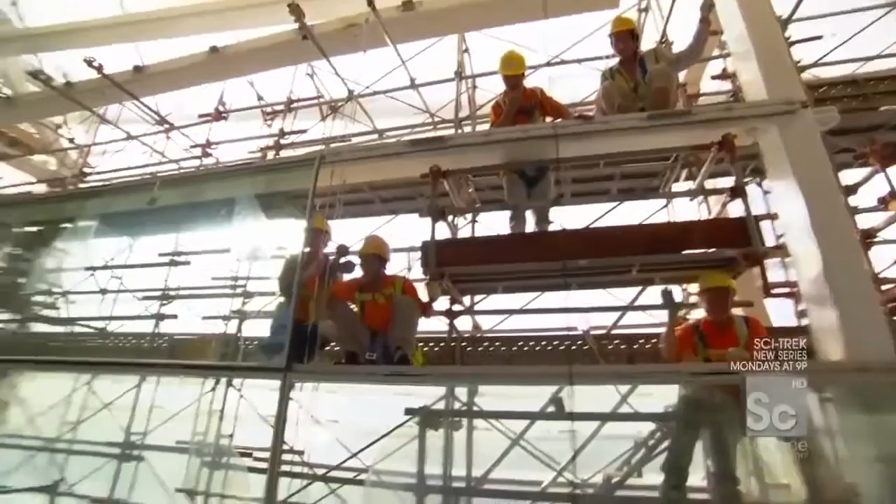Let's do it, Why. We're installing the 3rd highest panel in this section of the atrium, more than 100 feet from the ground. Safety harness? Why? I want you to be safe the whole time. In addition to Why and me, it'll take 10 other workers to install this 550-pound panel. The crew on the ground applies suction cups to the glass and then sends it up on an electric hoist to meet the crew in the air. Here it comes. Check it out. And waiting for me. Hello, my brothers! You guys ready to rock and roll with myself and Why? Ready? The big team. This is it. This is the Singapore Glass Stallions.

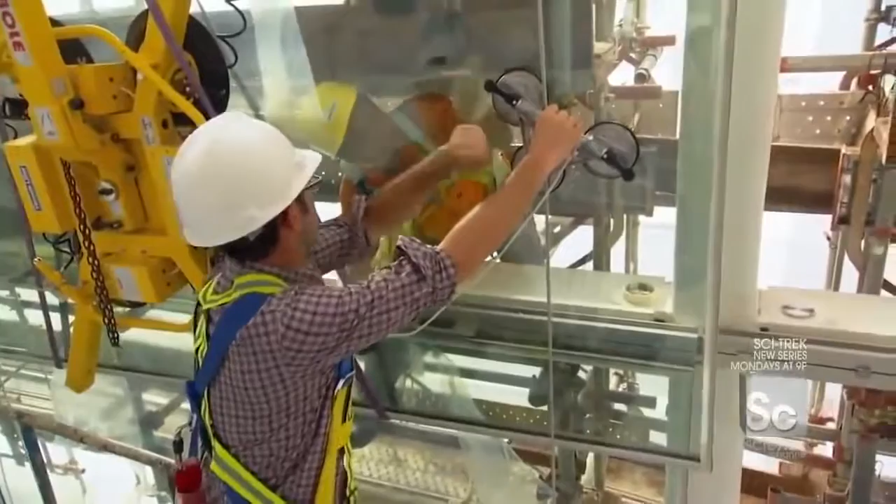All right, here it comes. It's a big piece of glass, huh? Why? Yes. What are we doing? What's the first step? The first step is we need to take off the handle. Yeah. So I'll take off that side, you take off that side? Yeah, take off only the handle. Turn only. Yeah, yes. All right, I don't want to drop it though. Don't want to drop it.

Okay. The panel is supported by a backup system of smaller suction cups to help guide the piece on its way. Okay. Oh, okay. Yeah, okay, guys. It's okay. Yeah. Let go? No, it's too scary. I'm not gonna do it. Okay, I did it. 好，坐上去啊。 And just like the glass fins outside of the towers, we'll finish maneuvering this panel into place with the chain block.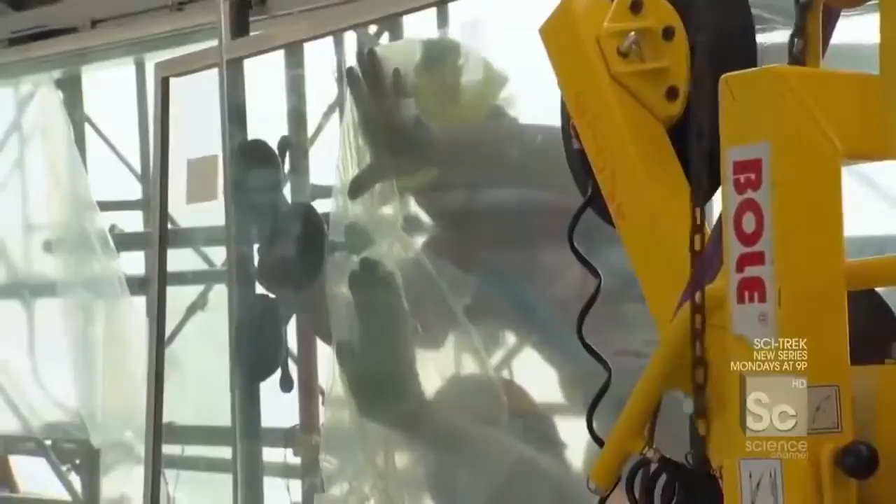Yeah, okay, guys. Okay, so the chain block has lifted the glass panel to just about the height, as you can see, of the previous panel. So the next step is to push it in and get it locked into place on the brackets. Okay, why? Should we bring her in? Yeah. Last one. The interior work for the hotel cannot get started until all the atrium glass is hung and the lobby is watertight. I'm pushing, why?

So to speed up that process, 20 attachment brackets come pre-installed on the atrium wall frame. They sit horizontally so the glass can slide into place, there we go, and then we'll turn them vertically to lock the panel to the building. Do I need the screwdriver? No, you use the power tools. I'm old school, why? Power tools. I'm old school. You make sure all the pressure bar must be tight because the hand power is not standard.

You haven't seen my hand power, why? Hand power. Tight, yo. Check it, why? If you don't trust me, check it. You have a look. That's just good stuff.

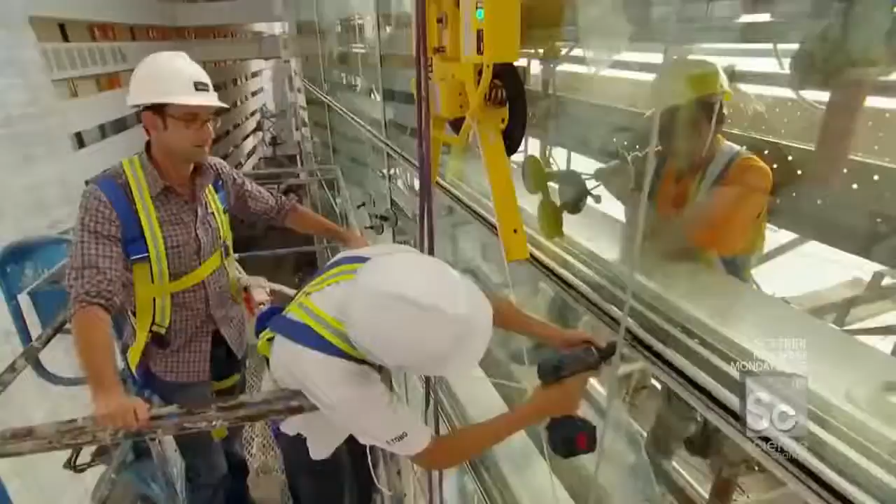Yeah, good. Very good. All right, so all 4 sides are locked into place, and this glass panel is now fully supported by the building. So therefore, why, I'm pulling the plug. Suction is coming off. 3, 2, 1. Okay. All right. Very nice. Yeah. Look at that. Nice, huh? Very nice.

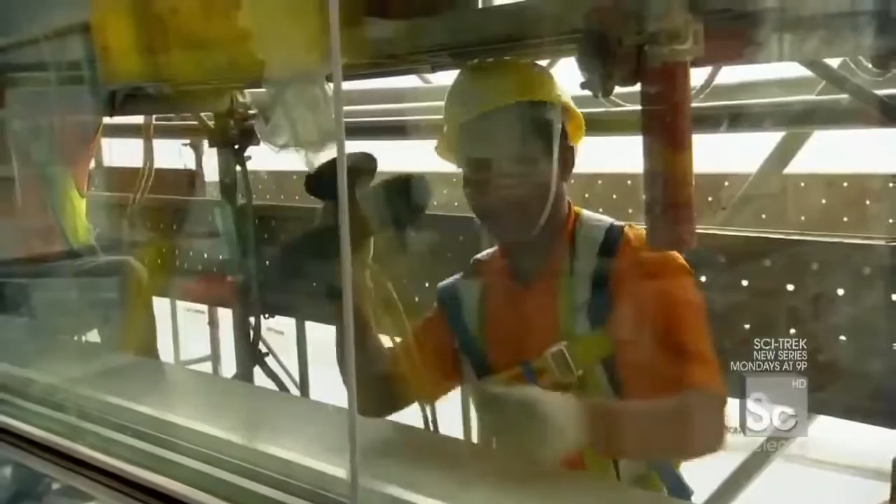Wai from Malaysia. And his team do this 25 times a day. Best partner. And in just 6 months' time, this entire atrium will be covered in glass and shimmering with natural daylight. Okay? It's you and me. Go home. Now go home. And by go home, I mean hang glass the rest of the day.

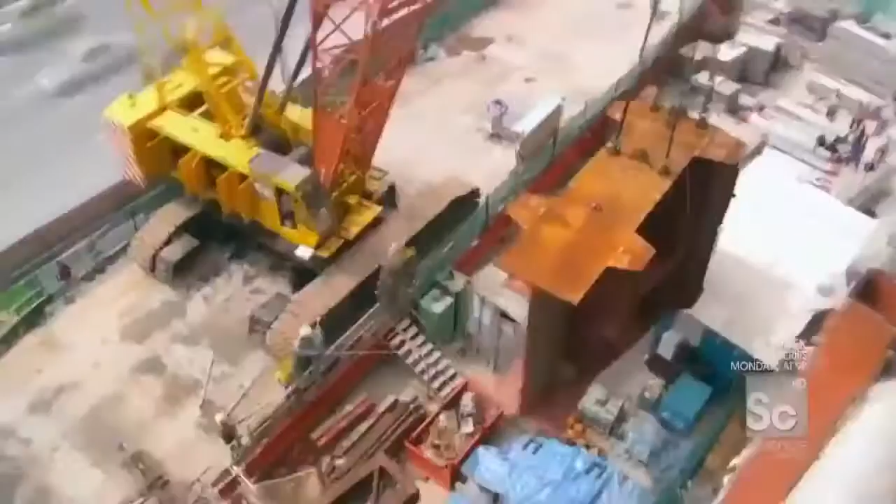Up next, racing to finish one of the largest paint jobs in the world. We're going to use a brush. Yeah, brush. This brush. After 30 years, Singapore's ambitious downtown redevelopment is nearly complete. Its crown jewel, the $5.5 billion Marina Bay Sands, is due to open in just 6 months. And crews are racing to complete the hotel's complex facade. The glass on the face of the towers is complete, but on the side walls, the concrete remains exposed. So to finish those walls on time, there's another massive job ahead.

When you clad the outside of a skyscraper, typically you cover it in maybe some stone veneer, maybe some glass, or maybe some metal paneling. What you don't do is you don't paint it, right? Because if you've ever painted a fence, every couple of years you have to repaint that fence. But here in Singapore, they're so focused on things being clean, so focused on the immaculate maintenance, they're willing to actually paint their buildings. So today, I'm going to do something that you would never see on an American construction site. I'm going to paint a skyscraper.

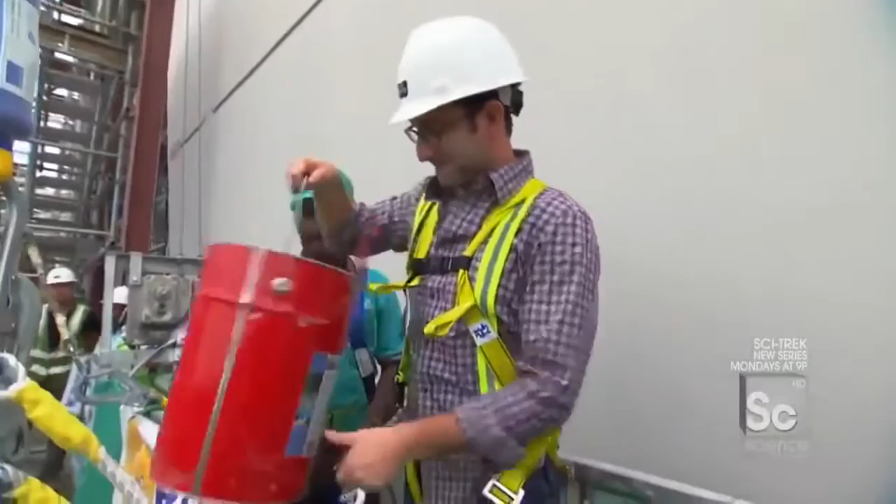Crews will have to paint an area about the size of Mount Rushmore. Muti, I'm Danny. This is going to be one of the single largest paint jobs ever attempted. So I got a bucket of paint, and in order to apply the sophisticated skim coat with the technology, we're going to use a paintbrush. Really, Muti? Yeah, this brush. It's a small brush, yeah? Small brush. One small brush. Right, and obviously you couldn't do a skyscraper with that little brush. That'd be crazy. So instead, I have a roller, which ought to really expedite the process. Painting fast. All right, well, what more do you need? Muti, yeah. Away we go. Okay.

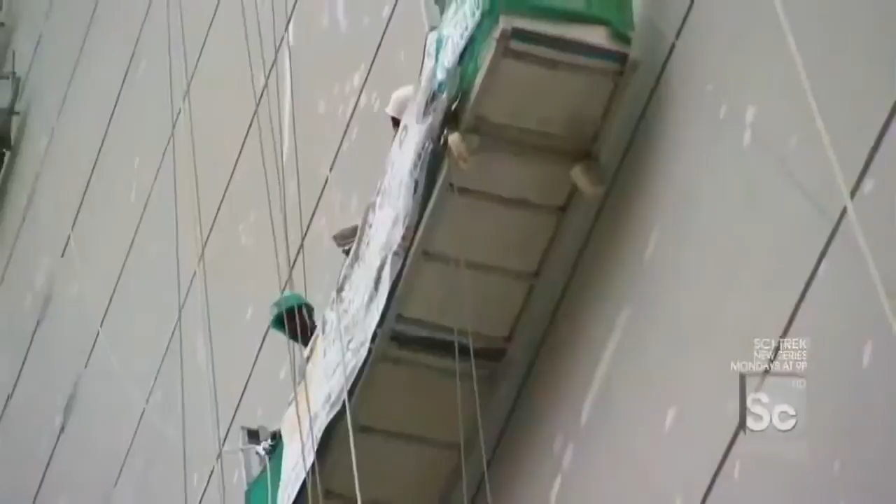This wall faces the country's main highway, connecting the airport to downtown. So Muti, you're okay? Heights, no problem? No problem, no problem. And on opening day, with all eyes on Singapore, it's gotta look good. Yeah, okay, so welcome to House Painting 101, Skyscraper Edition. So we're about 200 or so feet in the air. We've reached our cruising altitude in a super, super robust and technologically sophisticated gondola system.

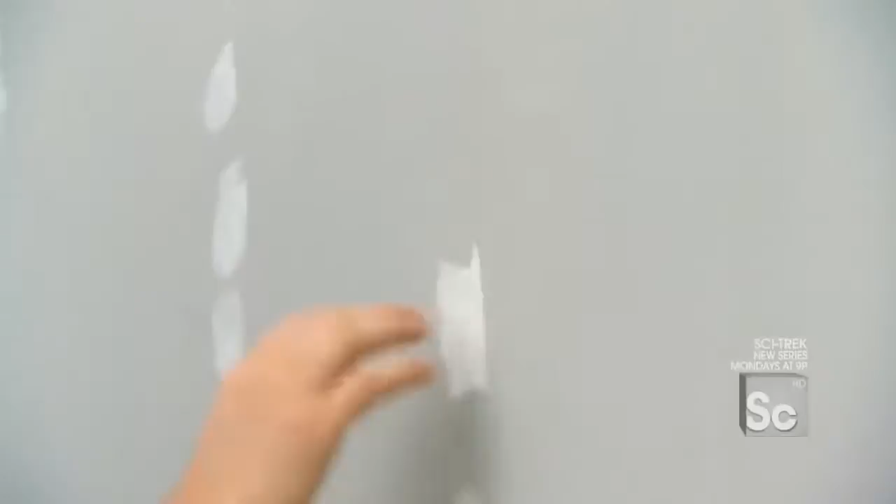And what we have to do is fix this. This wall is a mess, right? Little holes that they've patched and filled. We have to have one smooth surface ready to be seen by all of Singapore. Muti, start with the dark gray first, huh?

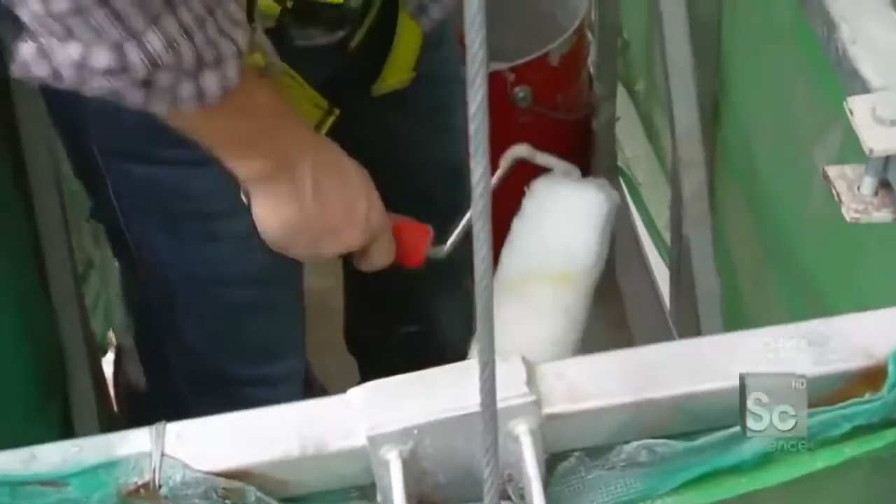Okay, first, I'm gonna paint within the lines here. The dark gray lines mark each floor of the tower, so you can still see the floor-to-floor separation from afar, giving a sense of scale to this massive surface. Okay, so now that the gray line has been deepened and darkened, we're gonna start painting the building.

So Muti, just go to it, huh? All right. Nice and gray. I like that Moody's looking over like I'm touching up the top of the Sistine Chapel or something. In total, Moody and the rest of the crew will use more than 2,200 gallons of paint. Muti, how's it look? Does it look good? Yeah, very nice, very nice. Good. Moody's loving it. To cover all the tower shear walls in time for opening day.

And this project cannot afford delays, because every month the casino is not open, developers give up $100 million in lost revenue. So these crews have been running at top speed since day one. So, John, just to put this in perspective for someone who's not used to seeing a project this size, it would take perhaps another country a project this big, this expensive, this complex, as much as 6+ years to build. Yep. And you guys are on target to complete this in 3 years.

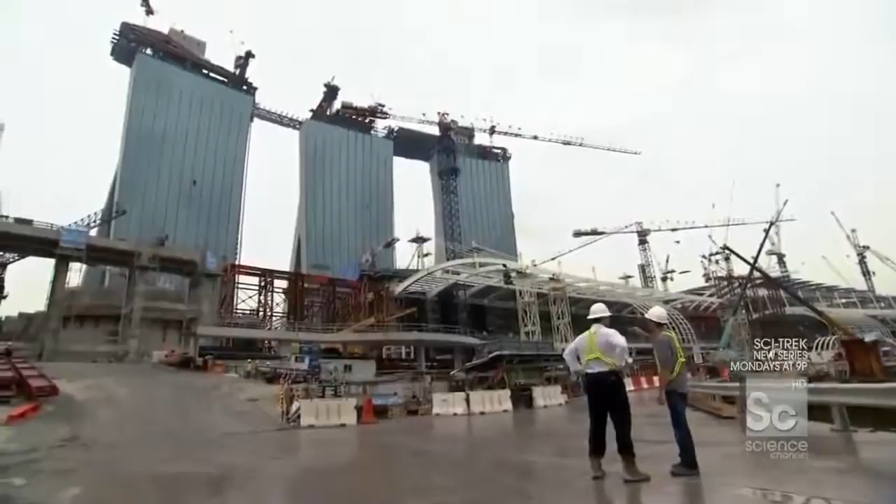Half the time. Yeah. And one of the critical aspects of this project at the moment is getting that Sky Park structure up. So getting the superstructure of that Sky Park done is key to closing up this project and finishing this race. Yeah. But this is going to be a sprint to the finish, because crews up at the top of the Sky Park have only 6 months left to turn this mess of steel into the world's longest elevated pool deck.

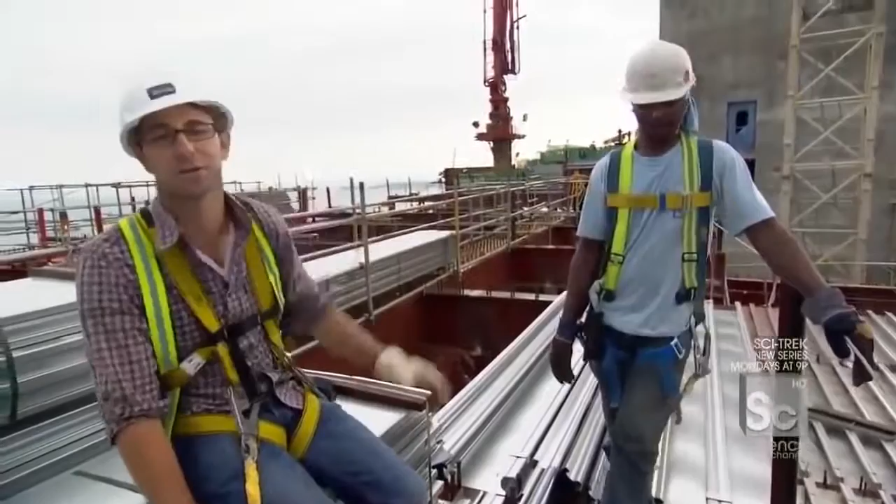This is it. This will be the pool deck, and that will be the pool. But there's a problem. I mean, there's a pretty big problem. You go on vacation, you come to the Sky Park, you see this amazing view of Singapore, and then you fall through a hole to your death. It's not good. Not good fun on the vacation. So Wilson and I are going to cover it with this aluminum decking. Cover the holes? Let's cover the holes, my friend.

We're filling in the bridge segments between towers 1 and 2, more than 650 feet up. And there is literally nothing below us but the decking we're about to lay. Oh, I just got that thing. I just looked down and I saw a car and it was so little and my body was like, wait a minute, what are you doing up there?

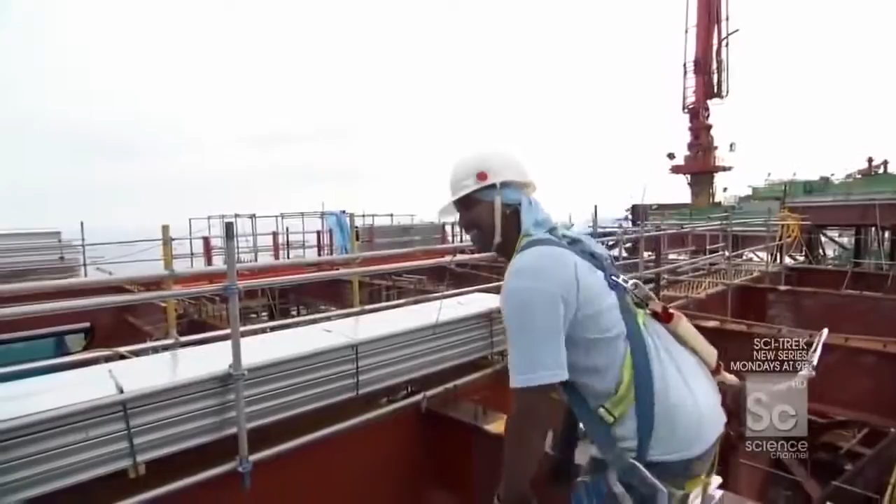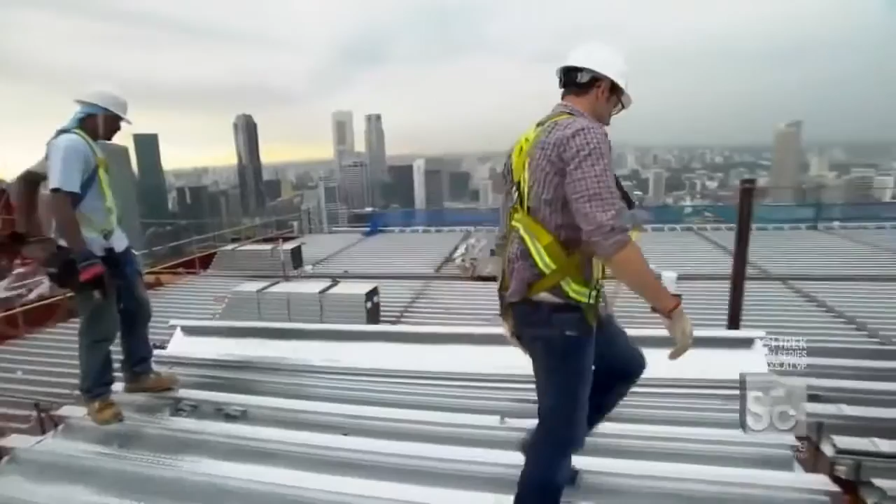All right, Wilson, how do we begin? Step 1? Yeah, step 1. Okay, you ready? 1, 2, 3. Okay. And slope in. Yep. Pull back. Pull back. Okay. Good. Put the clip on. Nice. Wilson, next piece. Plugging up the hole. Dear God. Okay, letting go. Woo! With these 10 panels in place, another 125 square foot section of this Sky Park deck is complete.

Last piece, huh? Wilson and the rest of the crew will have to lay down 300 panels a day in order to have the entire Sky Park ready for opening day. Wilson, victory! Wilson. When the Sky Park is done, people will be swimming right there, dancing on that cantilever, having dinner in that restaurant. Yes. But we're not done yet, are we? Come back in 6 months, check out this Sky Park.

Me and Wilson will be having a cocktail and enjoying this ridiculous, incredible view. You're buying though, right? Yeah, correct. All right, cool. Wilson's buying, so it's all good.

When the Sky Park is complete and the Marina Bay Sands opens, Singapore will join the ranks of the world's top gaming destinations and fulfill a 3-decade-long quest to reinvent a nation. You know, for me, the moment when a building actually becomes a piece of architecture is when it transcends its function. So what I mean is, think of the Empire State Building. It's not just about the people who work inside of it, but it's really about the spirit of New York City.

The Marina Bay Sands is a project with a hotel and a convention center and a casino. But in reality, the sum is greater than the individual parts. This is a project where an architect, an engineer, an owner, and a government have all come together to literally try and reinvent the face of a nation. And I think if you come back here in about a year's time,